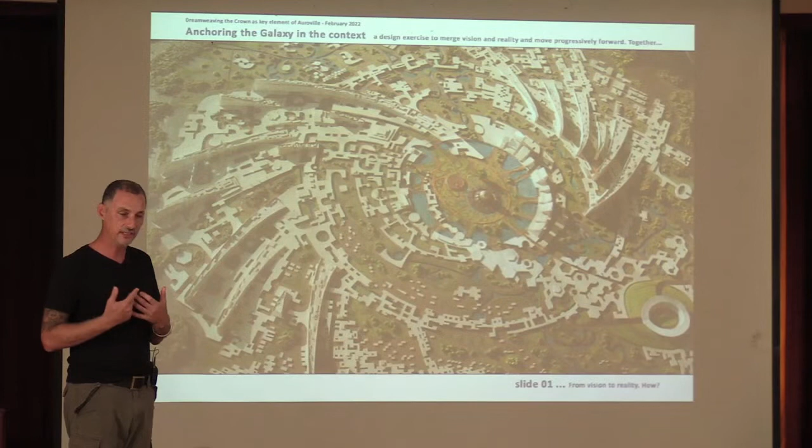So I picked that out, and I'm not shying away to say it was a kind of offering to see how I can bring together the image of the galaxy, its interpretation through the master plan right-of-ways, and land that in the context and see what really remains. How exciting does it become? It's something I always wanted to do. I always felt, how does this image, which is not realistically implementable now for many reasons, and I think it was never wished to be a one-to-one model to be built. It's an ideation, it's a process. I always wanted to see how that changes when it comes into contact with the many aspects of life in this area.

Yeah, maybe the next one, Sophie.

There were a lot of basic assumptions which I put down for myself, not to offend anybody, but just for me, what's the framework? Also I did that work because for me it was unthinkable working on the crown and providing for the ideal version of the crown we all want, which is reduced traffic, e-mobility, non-polluting, pedestrian. I still have to see what I do with the traffic which is here and around us, how I facilitate that to come as close as possible to providing the framework for that to happen.

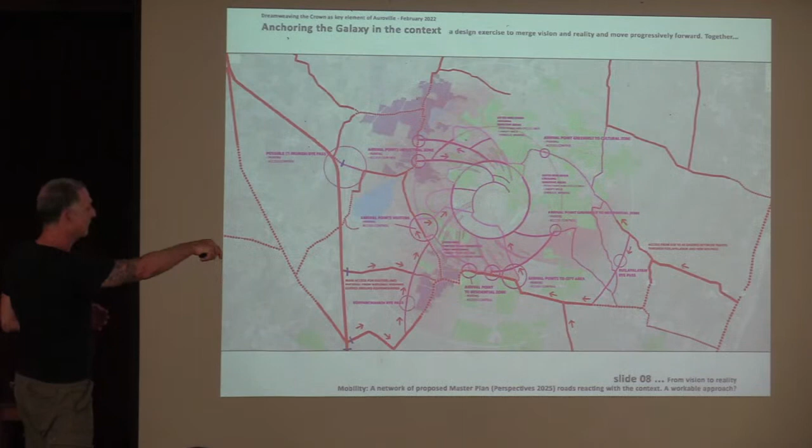Here at Irumbai, where I have the temple, which could be a very beautiful spiritual arrival point, the road comes from Kut Road over the Red Earth Riding School, next to the visitor center, or extending down to the road which goes to Auroorchard and Hope, then into Edayan Chavadi, or coming up from Bomayapalayam, Jaima corner, going a bit up on the already paved road, and then bypassing Kuilapalayam village on the outer line of the master plan area.

So here I listed out the key elements of the mobility proposal as a summary; there are many more points. The first would be an in-depth study of the existing traffic situation and patterns, making reasonable assumptions for the near future. Lalit was a great inspiration with his growth studies of the bioregion, looking at what constitutes non-Auroville traffic versus Auroville traffic.

Using the existing road system to Auroville's advantage, upgrading it wherever meaningful, having efficient filtering and check systems in place to sort traffic into and through Auroville. Most important is to establish efficient relationships with the local administrators from the bottom up, and to unburden the neighborhood villages from excess traffic directed to Auroville via bypass systems.

Guide as much as possible all visitor traffic to Auroville to come from the west, from the national highway, via designated roads bypassing Edayan Chavadi. Block all traffic trying to use our roads to avoid the toll at Moratandi, which should be fairly easy. Implement all the proposed master plan roads wherever they make sense.

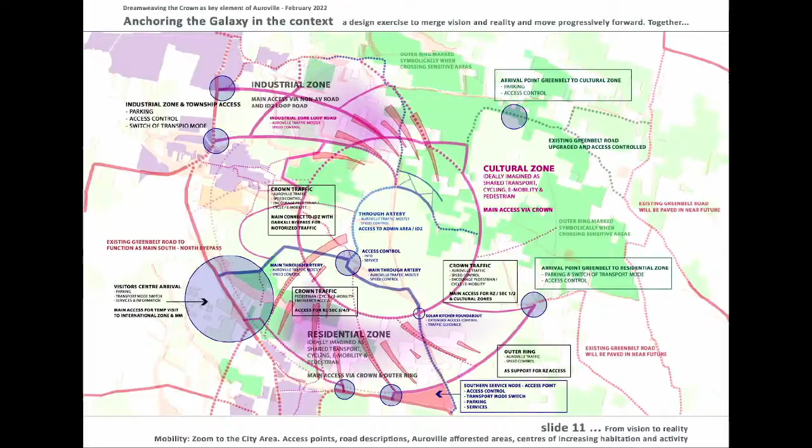I have the Crown Road, which can have different experiences. It could be, and I'll go to that next. I have a large access here for the industrial zone from Kottakarai and just south of Alankuppam. I can form a loop road with just the extension of existing roads over here.

Next, focusing on the Crown - the idea was, and I borrowed a little bit from you, these jewels of the Crown, to have, wherever the Crown interacts with the different zones, the different roads, different lines of forces, different parks, portals or focus points which could have a very distinct character.

So the whole experience - and I think this was very beautifully mentioned by Marie - the whole Crown is not one singular kind of experience, but it's really an expression of the diversity of the place, of the people, of the different contours. Next please.

Then it goes here into sorting that a little bit more. Starting from here, I have the Solar Kitchen roundabout, which next to the one down here is another additional traffic switch - another filtration, parking point. I have the existing Crown here, so I could have a small plaza here where the Vikas radial starts.

I could have another one here just south of the private land over here. I have a large potential of a beautiful public plaza at the cultural zone.

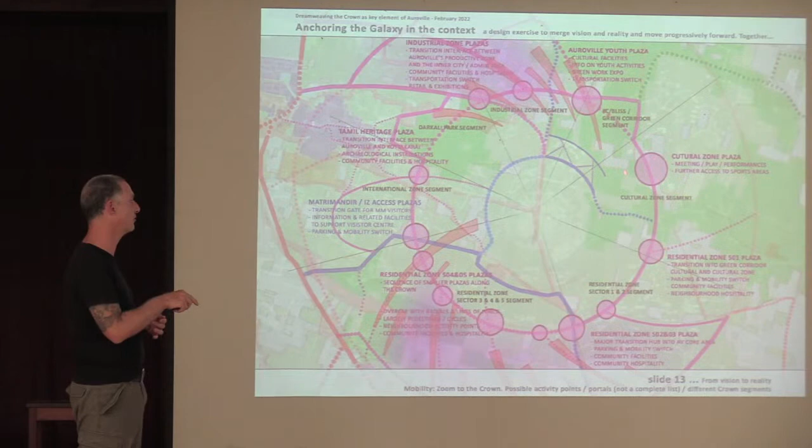Next please. So here we have a little bit of the general feedback provided last week. There was overall appreciation that the approach takes a realistic look at the overall situation and focuses on mobility, something we all experience in our life. There was general agreement that any work on the Crown needs to look at the wider context.

Maybe that was also a shortcoming in our dream-weaving, that we focus only on positive feedback. Maybe that can be reviewed, because sometimes critical, negative feedback can be extremely helpful.

It was very much appreciated to look at the dense situation in and around Auroville, in the local neighborhoods of Kuilapalayam, Edayanchavadi. There was general appreciation that the existing roads are seen and used as a given reality - an opportunity for effective and neighborly collaboration, and a chance to explore forward-looking and sustainable traffic solutions inside Auroville. Next.

Discussions of the advantages of keeping access via the Certitude Road or via a new radial. I show that the appreciation of how the proposal aims to find ways to route motorized traffic around sensitive areas.

Darkali, Bliss, even Silence in the industrial zone. A big appreciation of the attempt to deal creatively with the symbolic expression of the outer ring in sensitive areas, such as the northeastern transition to the Greenbelt. We have Gaia Forest, Samridi Forest.

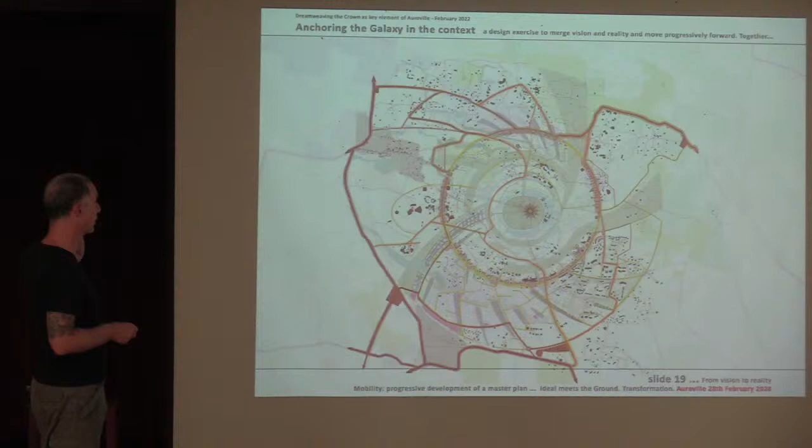So now the focus would be just to zoom into different areas. So here down, this would be the residential sector 2, 3, 4, 5, with the highlight being the line of Goodwill.

So there was a discussion really on: do I keep this road, which has been there for us for 53 years, or do I open up another radial over here and have access into here? I believe that having that road offers us great potential — it's there, it's funded by government money, so I can't easily undo it.

And it really allows us to work as an immediate step, starting from here. We have to talk to the landowner here. But is this already 20—

2 minutes. Ah, okay.

So good — this allows us to really build the most ideal version of the crown that we are capable of right now. This is in discussion, this is there. I don't think there's much resistance; I think everybody is really waiting to start with something like that.

At the same time, we can use that entrance here — this needs to be seen what that becomes — and work on this segment of the outer ring, which we did already, which is part of your planning. I think you presented it to the governing board.

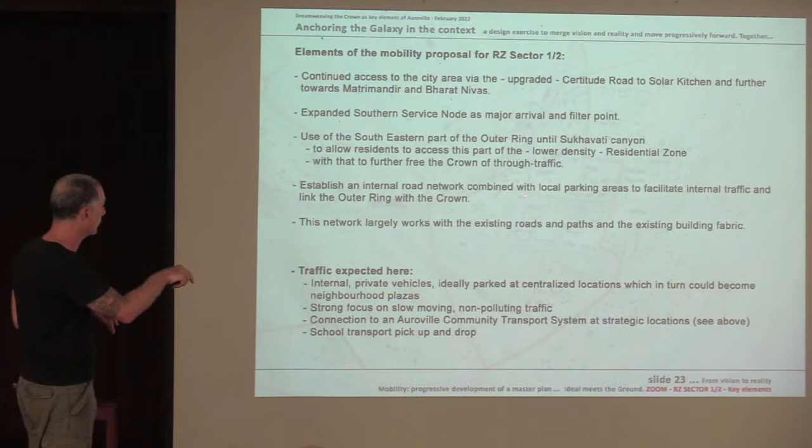Strong focus on slow-moving, non-polluting traffic, connection to an Auroville community transport system. I could imagine the school bus going along that route, and kids use that, they walk here - this is all then perfectly walkable. There's a pickup point here and then it goes further to the cultural zone.

Here we come to the cultural zone. Ideally I don't have any through traffic from here towards the industrial zone over here. Industrial zone traffic is largely taken care of by the industrial loop roads from the Kotakarai Alankupam roads, and I have the road coming in from the northeastern Greenbelt coming in here. It's remaining, but there is hardly any traffic on it, so the traffic would really stop here.

If I have larger events, I have the stadium, of course I have to deal with traffic coming in and I need adequate parking. There was the idea of creating, to further free this part from through traffic, a road here along in between the green corridor and the sports area, coming from here and ending up somewhere at Dana, carefully cutting through it, not really disturbing much of the beautiful sanctuary forest we have over here. This would further allow people, if they have to come from here, they could go here and then down here.

And then furthermore, I could have another - I think Tejaswini will maybe talk about it - there is another bypass behind Kalabhumi to really create an almost pedestrian, very active, alive cultural zone.

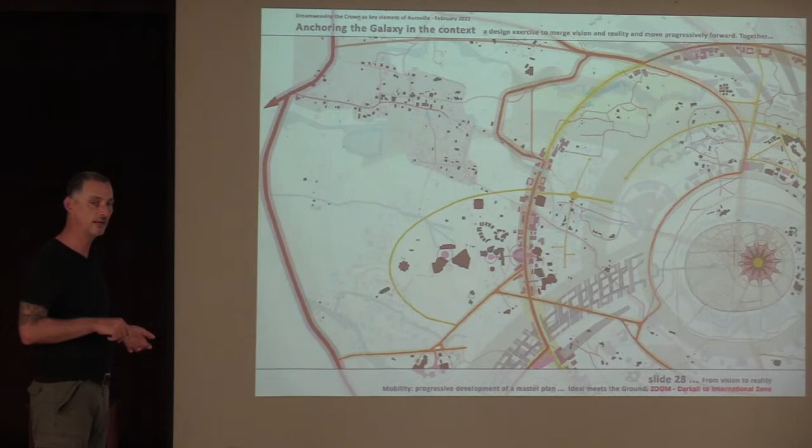Next, please. So this is then the focus on the crown. Next, please. And these are just step-by-step implementations of what could be possible right now.

Find ways to unite the majority of the community behind a shared vision, a concerted effort on land protection, land acquisition in collaboration with the Auroville Foundation, your office, the state and central government, and the Auroville International Centers to help with fundraising.

Establish effective bioregional communication channels, establish effective access control points, toll gates from the national highway, strengthen the Auroville security system, decide on the upgrade of the Certitude Solar Kitchen Road as provisional 10 years plus, and a second transport switch at the Solar Kitchen roundabout, which many fellow architects have been working with.

Start planning on the segments of the crown that we have - either the existing one, the one on Michael Bonke's land, or the stretch clockwise from the Solar Kitchen.

Improve with small interventions, like Tanya and others said, the existing paved stretch of the crown, and start with community-wide consultation processes to actively involve the RA. That's it, so I'm really looking forward to tomorrow. Thanks.

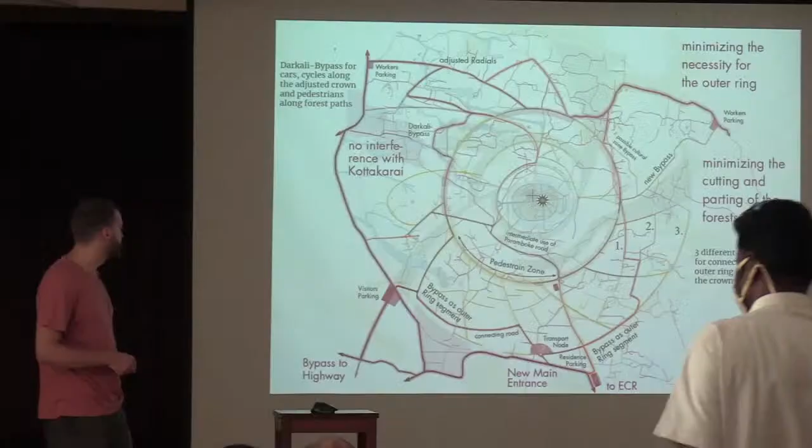In this version, I included also the transport node, which is in the '99 plan. I think there's not much that speaks against it, actually.

For a first step to solve the parking solution, maybe to get something in place like a car sharing, we could have parking houses here, right at the entrance, and the visitors parking here.

Maybe one point that I find important is also to think that we keep using these roads, but there are different points where this road can be cut, like in the entrance here or with a line of goodwill there, to make the inner zone more calm.

I try to become a little more specific with the plazas around the crown, identifying centers where it would naturally be to have these plazas.

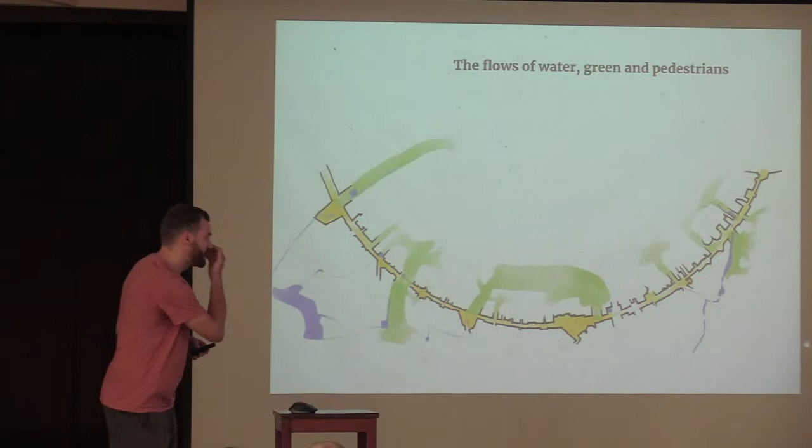You can see the interplay of the major plazas, finding these spaces, and also interlinking them with green, opening at least two of the main plazas up to the green space, and having the water catchments around the crown.

And one thing that, when I try to kind of get an idea of what is happening in this pedestrian zone, what kind of typology suggests itself by what is there on the ground, taking into account that I kind of would want to create density to make the crown important and connecting.

Maybe in the first part, from the Solar Kitchen Plaza to the first Radial Plaza, it could be very dense and city-like, maybe even G+2, G+3. Then in the middle, where the crown intersects with the Joy community, you have a kind of loose ensemble which is around the crown, and maybe this could be picked up on, so a village theme could be created there. Then towards the green corridor, and towards the line of goodwill, the structures would get bigger and bigger. So it's three themes: the dense city, the village, the megastructure.

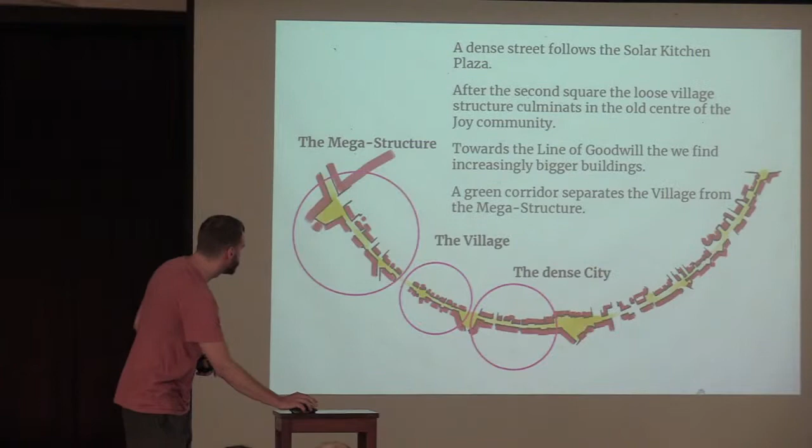You kind of see the more loose ensemble, and then with one line of goodwill touching the crown, the next theme starts.

And there I just have two versions: one not including the green corridor in front of this line of goodwill, and here it's there.

One major angle for me to kind of get a sense of urban planning was the writing of Christopher Alexander, because I really appreciate how he understands space making and all that. The most well-known architecture book of the 20th century is actually A Pattern Language, where he created an encyclopedia of well-functioning patterns in architecture, and this concept was quite influential, even laying the groundwork for Wikipedia and stuff like that.

I go into so much detail because I think it could maybe be something of how Auroville could communicate with Vastu Shilpa and evaluate the specific points of discussion to really have a good dialogue going forward. In that manner, I brought also a few ideas of how these patterns could look like. So the main thing is you try to really coin a term so it becomes graspable, a clear problem statement, then a discussion, ideally with a lot of scientific input, and then a solution of how you want to solve this problem.

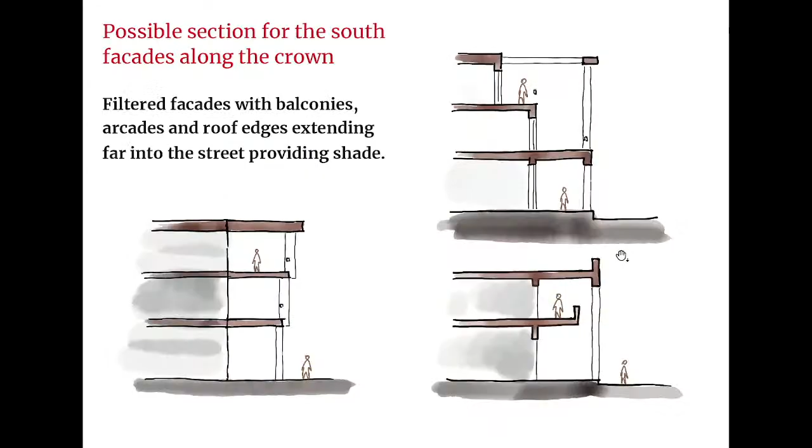And then apart from that, also what other shading elements could be interesting for placemaking. One pattern that I picked up from Vastu Shilpa is actually having these water catchments along the crown, where the crown kind of creates this bund, at least nearly all the way in the residential zone — this typology of the catchment pond with gabions, so you would have a kund, which is a percolation pond at the same time.

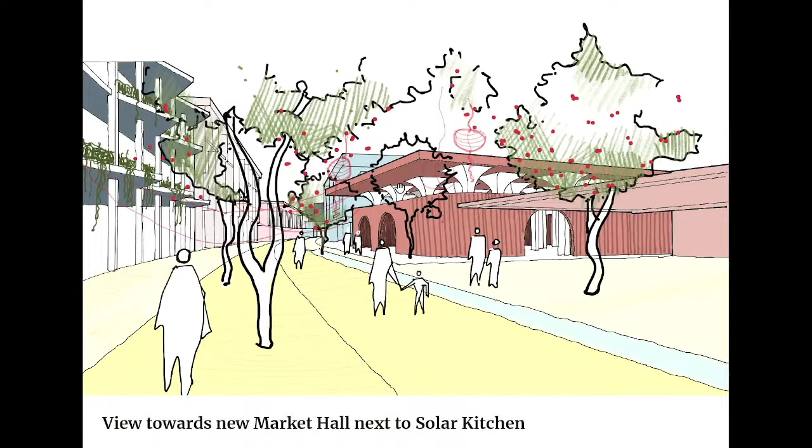Again, the view on the Solar Kitchen Plaza. This is a little exaggerated with a water tower, but to get an idea. This is a market hall that could be where Foodlink is now. And this could be the second plaza at the radial, again with a communal space along one of the vistas.

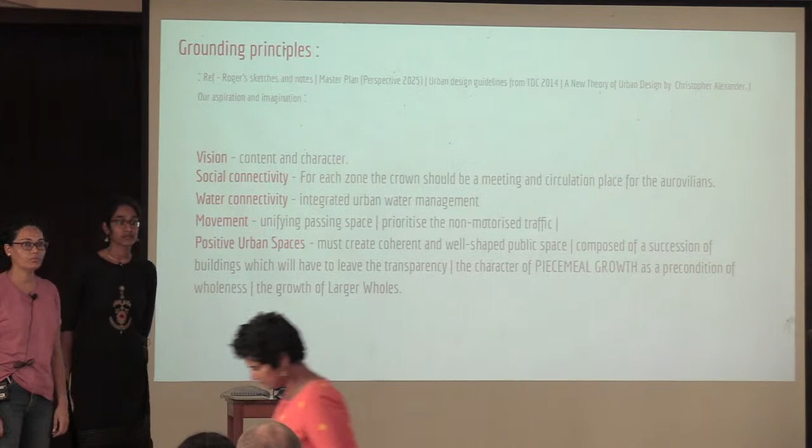Hello, everybody. We'll do a little recap of what we had done so far. Starting with the grounding principles, more about the content and character, which is not only about the road along the crown, but all the projects and spaces that come along. Social connectivity and water connectivity, because we have emphasized a bit on water in our coming slides. Movement, we're looking at this more as a unifying passing space and not as heavy traffic on the crown. And looking at the urban spaces, we are basically saying create more coherent spaces and let the projects or activities which come along the crown relate to the larger whole, not just as piecemeal in itself.

Oh, that's too fast. Right. Okay. So I won't go into details because we touched upon this last time quite a lot.

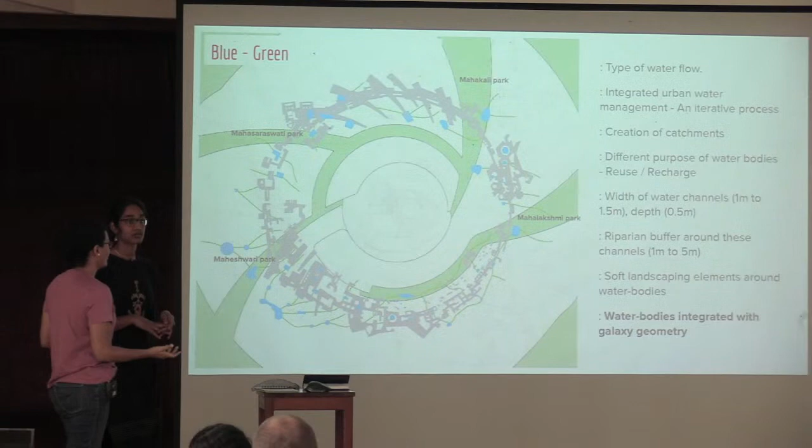Starting from the north, that keeps changing according to the lines of forces, the number of which is always varying I think. The notable thing here is that water management is an iterative process, it's not going to be like this forever. Somebody pointed out in the morning that the water in the galaxy is looking different, more flowing. So from here we can move towards that, because we will be having more density and the runoff will be much higher. We will work out a different strategy that will evolve as we are developing.

Why does it go so fast?

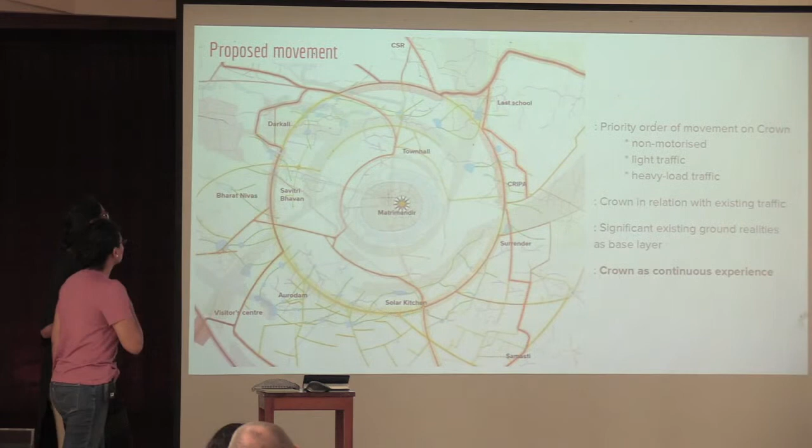This movement, we won't go into details because Fabian has already touched on it. We're looking at the crown more as a continuous experience and less of a vehicular one, so the different details we've worked on will show more of that. The place where we've done things differently is here, where we are not making it motorized at all, but going around it, and we'll come to that when detailing that stretch. Just a quick thing, sector 3, 4, 5 in the residential zone is cycle path only, then it continues as a motorized road, vehicular road. Through Darkali till the end of that little radial coming in here right now is only cycle path.

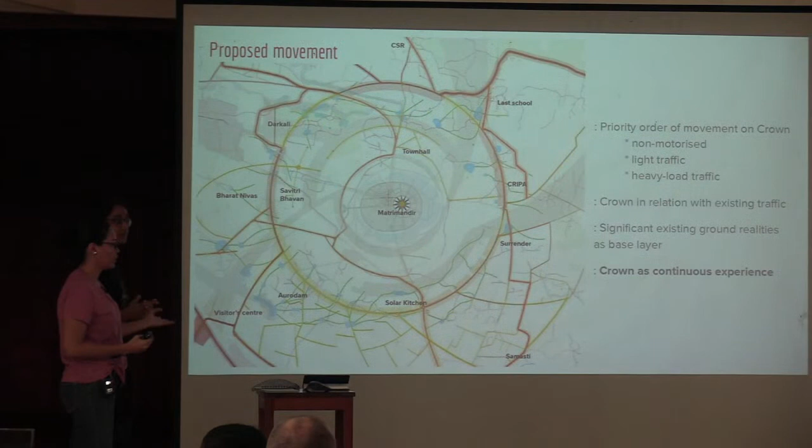So looking at the human experience, basically, the kind of spaces that we've created all along, we're trying to see how we can experience the crown.

When you come to the junction of Matrimandir Visitor Center, there are tourists there, and also a kind of diversity there, which is also an initiation for many people into being in Auroville. Going further is an archaeological site, so it's a kind of connection with the past.

Then you pass through Darkali, which is basically about being with nature, building relationship with nature and different forms of life. Going further is a kind of exchange zone - there is trade, this is the industrial zone. So trade of nature, there would be a lot of learning spaces and interaction spaces.

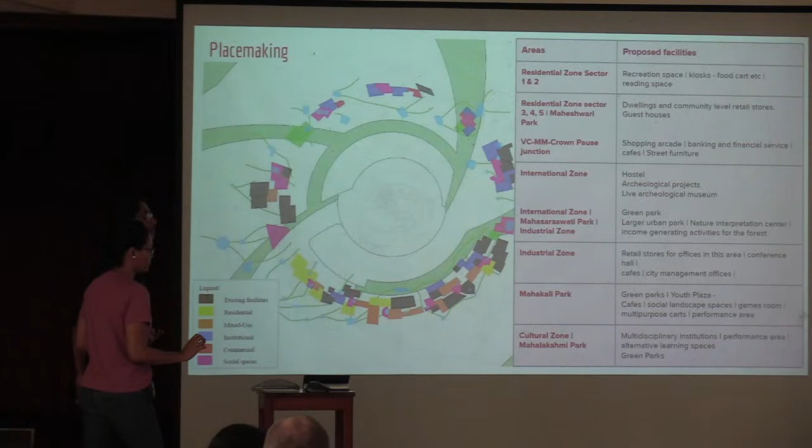Is this the master plan? Yes.

And so this is where we start. Last time we tried to look at 16.7 meters as right of way and worked around that. Within there was flexibility that we kept between 2.5, 3.1, you all know those numbers. We kind of rearranged them, and at that time the aim was basically to see how we can get social landscape spaces and give them more priority. That still remains, but over the last 2 weeks we had detailed contemplation and also a lot of feedback that we got last time.

Now what we're trying to do here is actually fixing 2.5 meters as an infrastructure corridor, mainly for the HT and LT lines and maybe OFC also, because we need that ring as per the electrical master plan. So that could remain there. But we felt that to give the kind of experience we're talking about, if we clear out that 16.7, we are losing a lot. That also got confirmed by the presentation we had - basically do the other planning first, and infrastructure would fall in place according to the planning that you make.

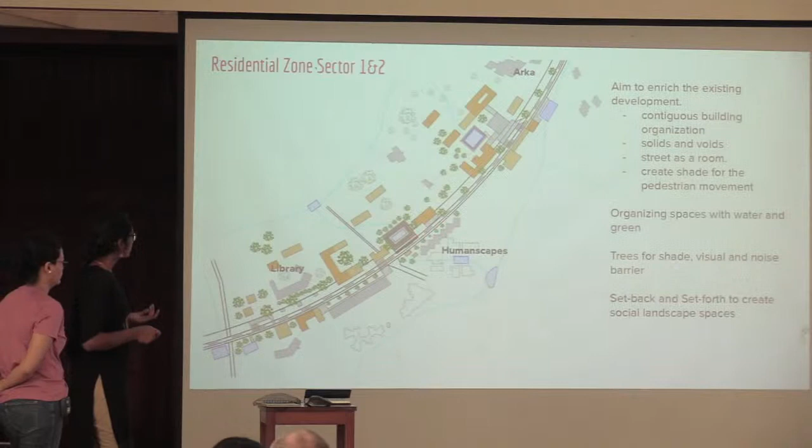And then as we go along here, this is humanscape, and then there is another water body that can be coming there, and around that is kind of a stepped environment, which is again a seasonal water body. So when there is no water, it can be a nice interactive space where some performances can be happening and all those things.

And then here if you see, it sits forward in that space - it does not come on the road but sits forward. So in the evening the road also becomes like the whole space, and there is no curb that we are thinking of.

So another courtyard here again, and then this is Kalpana, and then there is a colonnade that is already going, and then there are some trees.

And here we try to second the point that Ganesh mentioned, that instead of looking at avenue trees, we use trees for how they can help - either as a visual barrier, or as a noise barrier, or to provide shade. All those kinds of things we have explored.

So here is another courtyard. Around evening there can be some small kiosks put up, and it can be totally different, and then it becomes a road again. So that was the idea here.

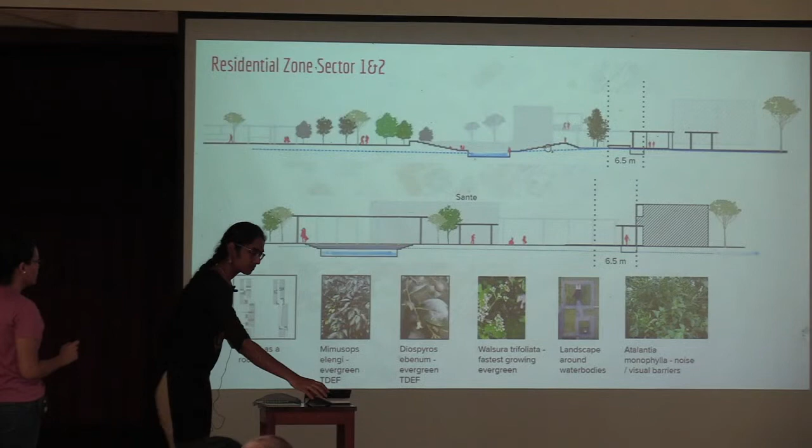And so in this stretch, knowing that north is up, there is a lot of - we all know that this road has always been very sunny. So what is important is to build across and close-knit, have trees which would give shade and act as noise barriers, etc. That's very important climatically, to organize those spaces and have that stretch of road more usable, more like we say, street as a room.

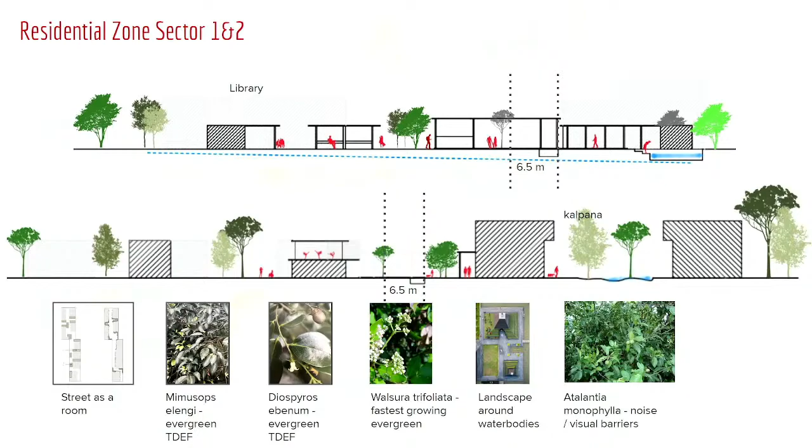So these are some of the sections. If you see, this is the road, the 4-meter road, and then the 2.5 infrastructure. We try to show what is happening around, because it's a continuous experience, not only along the crown but across the crown. So this is the courtyard we're talking about, and here can be room for kiosks that can become active, seating area for dining and all those things. And there is a nice corridor leading inside to a nice water body.

This is another section, in front of library, and this is in front of Kalpana, and in front of Kalpana again the road is there. There is something happening. So this building is set in the social landscape space, but it gives a walkway.

That's another exploration. We also tried to explore some of the species that can be used for providing shade, which are evergreen and TDEF species, which you will see here. Thanks to Glenn and Islin for helping us with that.

So this is another section in front of humanscape, and in the background this is the water body I was talking about. Another thing is, in these spaces we've created in front of humanscape and in front of Kalpana, during this monsoon there were, for 3 days, water above the crown actually. So that clearly shows we have not made ways for water.

So instead of undoing the road and doing it again, we can let the water flow on the crown, and make a nice small dip above. So the water is flowing, mongooses can cross, and all those things can happen. And then we still have a road, which also acts as a speed barrier - if you have a straight road, it's like a speed breaker, gradually.

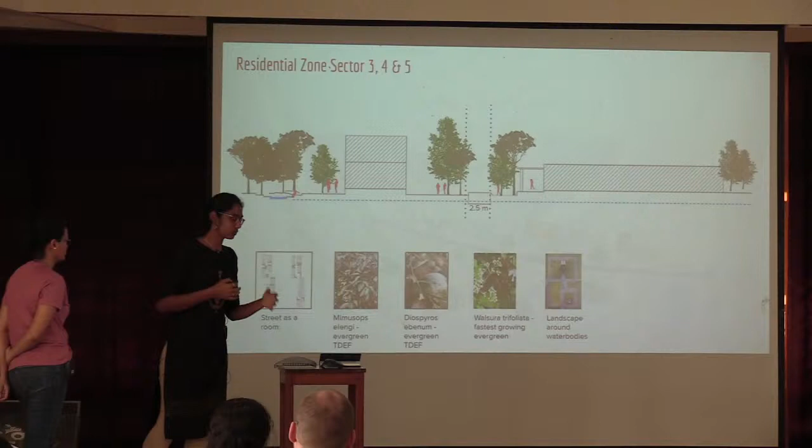So coming to the international zone, we have taken this area from Unity Pavilion to Language Lab, which has a very significant space of the archaeological site. So here we are saying, go to the section.

So yeah, this is again the 6.5 continues. The important thing is because we have this area of importance, we have this little deviation of the motorized road, but still the cycle path and walking experience continues along the crown. This is to respect the... and also we could easily make the archaeological site part of the social space.

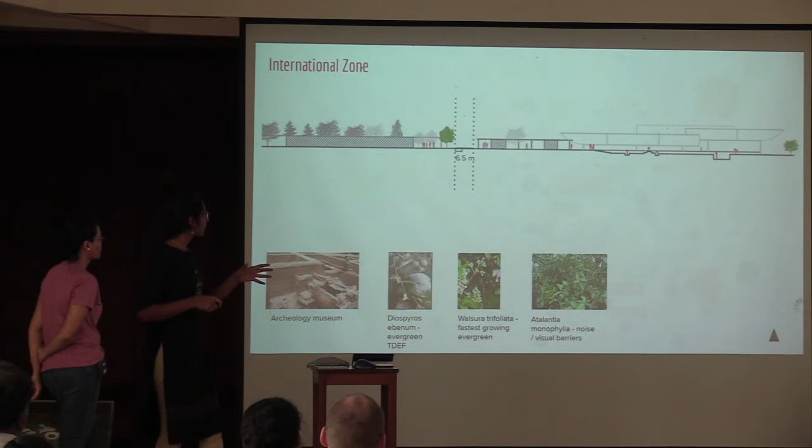So we have this kind of underground experience where we have the live museum and everything. This is where we talked about the human experience. It's really to the scale, and we are connecting with the past, so that is very important.

So Darkali, as we go, the main idea is to keep the edges active with activities happening in the industrial zone and international zone, and then keep only the cycle path through, because if we do much here, we are disturbing the ecosystem that is there.

But it's an enriching experience for us to have it. So we're doing as minimal as possible here, and trying to coexist with all forms of life. So it's not only trees and not only those things, it's all forms of life that we have, and they play a huge role in our ecosystem balance.

Coming to the industrial zone, I think many of you have done this. Don't look at the number of lines of forces, it confused us too since at times it was 4, at times 6. But basically, the low-lying buildings along the crown could come up now, and this stretch of road could be developed pretty soon.

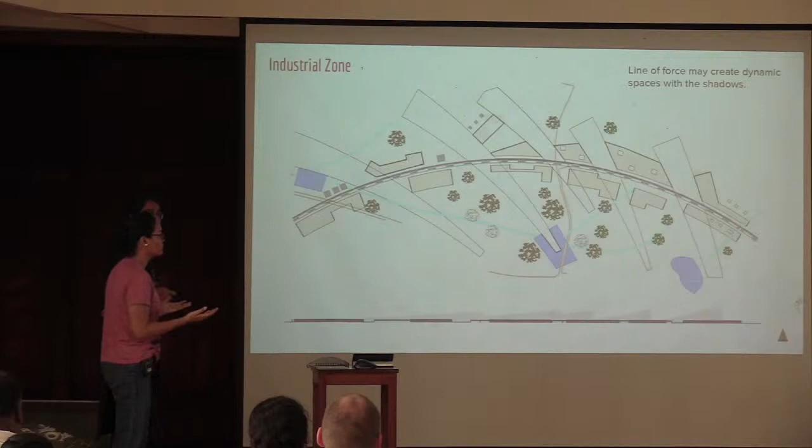Spaces-wise, as we said earlier, we could bring offices and collective spaces which would cater to the industrial zone, like retail stores and courier services, and also borrow from different zones to create a nightlife in this, like Shivangi and Radhika had talked about.

What we are focusing on mainly is to create unbuilt spaces, but organize them in a way that responds to the footprint and the need of what actually existed there. So youth, when we say it, is not only restricted to the youth center, but could be enlarged in a very beautiful manner, creating spaces for youth-related events and activities, or even otherwise. We're talking about this stretch more than just a cycle path.

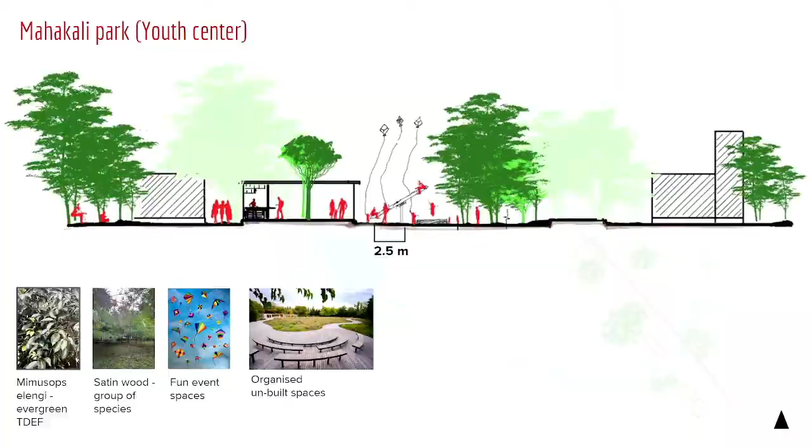That's the section, which is 2.5. It stays because the HT ring and electrical stuff can go through that, and if required, other things could also plug in and go through it. You can see the way these spaces are—they could be very semi-open spaces with tree shades and stuff like that.

And have a vehicular road which is a little bit offset on the outer side. You can see this is Kripa, and that's Kalabhumi. If you see the scale of the hexagons, we're not talking of something very, very big. There are a lot of existing kaya trees here, so it will be challenging to see how we incorporate those and actually build into them—that's going to be very interesting.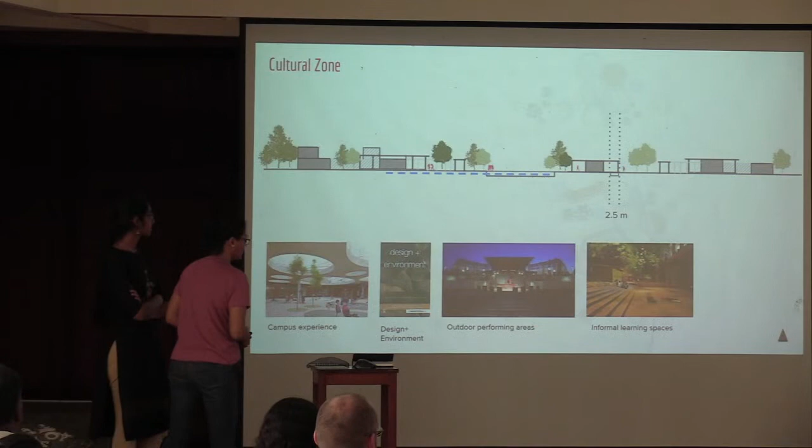That's the section through there. What we're saying is 2.5 again stays here. The water flows along and could become social spaces, meeting spaces. These are just some pictures from different campus learnings. There can be night street plays happening right on the crown. So when it's not defined, we can define it with activities rather than space or any enclosure—that is also a possibility.

Yeah, I think that's all. That's all.

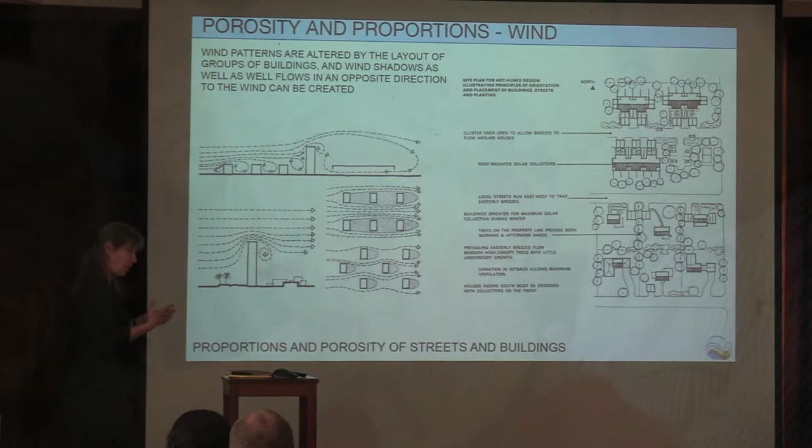This allows for the low sun, the trees to shade the buildings from the low sun in the morning and in the afternoon, because the south and the north facades we can shade with overhangs.

So then going back into the porosity, what happens in urban environments when there is more buildup, more impervious surfaces.

It increases the runoff and it reduces the capacity for the ground for the water to percolate into the ground.

So it's something we have to take into consideration while we develop the city, that we have this water and we have the climatic situation of having this very short stretch of the monsoon where we have a lot of water.

So we always have to keep that very much in the forefront of our minds when planning anything and reduce or minimize the impervious surfaces.

That also translates to buildings in general, the porousness. So I tried to take a little bit of a bigger building.

Just letting in the light, the daylight, making sure that the wind can flow through, allowing for vegetation in the buildings. I'll come back to that later.

And then, of course, also being able to look through the buildings so that it reduces the massiveness of things.

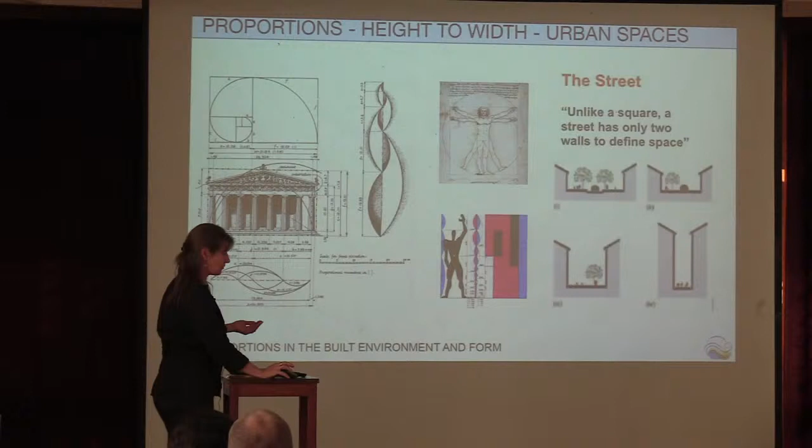So looking at proportions and scales in urban design and buildings in general, this is just an image. It's been done for hundreds and thousands of years. Humans have looked at these things and thought about them. It's something we just sometimes have to make sure we take care of.

So then back to the slide which I had last time, it's just the familiar streetscapes of the proportions of what we know in Pondicherry.

Just looking at that and giving it some scale so that we can understand the different proportions of residential streets, mixed use, and the shared mobility in the narrow street, which is a wide road but it lacks shade.

Although it is used, everybody's always trying to find that little piece of shade, which is usually used up by vendors. And the beauty of public spaces which are integrated into the urban fabric is something we really have to look into also here.

Then the problem is if there is no shade, the spaces become very reduced in their capacity to be able to use them, so then they're only used in the evenings.

And then looking again at Pondicherry's planned and unplanned or semi-planned green infrastructure.

Beautiful trees, but they're not given the space they need, which leads to all kinds of problems in infrastructure, in the buildings and in the roads. A slightly better option is where they've started planning, but you can see that when these trees grow to this side, the situation will not be that much better. This is a slightly better situation.

Then another problem is as we develop the city, something Islan mentioned also is the heat island effect. Something very important to keep in mind, because the more buildings, the more heat gets absorbed in the buildings, which radiate out, and vegetation can help a lot in reducing that by shading the surfaces of the buildings so that they don't heat up.

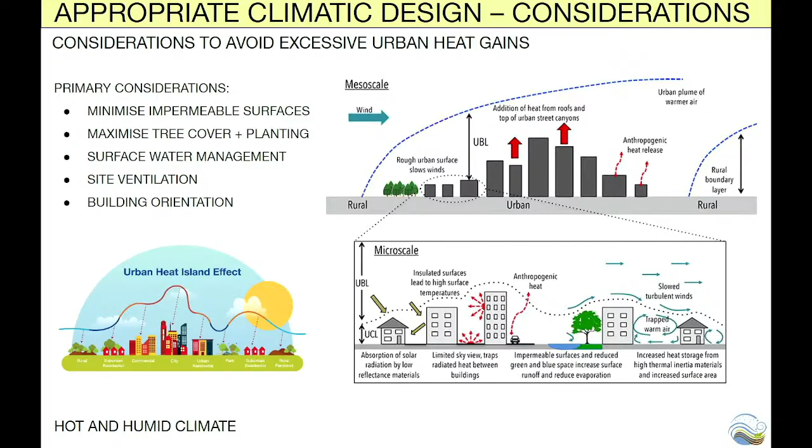Here again we have just the list of important things to consider with the runoff and the difference between the two.

Then going a bit more specifically, getting more into this actual site situation. Allowing always for the wind to pass through the site so that the houses have natural ventilation as much as possible, which can very much avoid air conditioners, which again lead to more global warming.

And the importance of having vegetation in and around buildings. It's great for thermal comfort, air quality, it absorbs noise, so if you have trees and plants close to the building, the noise from your neighbors gets distorted and absorbed. And of course, the biophilia, which is humans are better off in green places.

Just some simple considerations: what I already mentioned is ensuring the shading of your facades on the south and on the north, because we are close to the equator, just 12 degrees north, so the sun actually goes to the north from May to August. So we also need to have overhangs on the northern side.

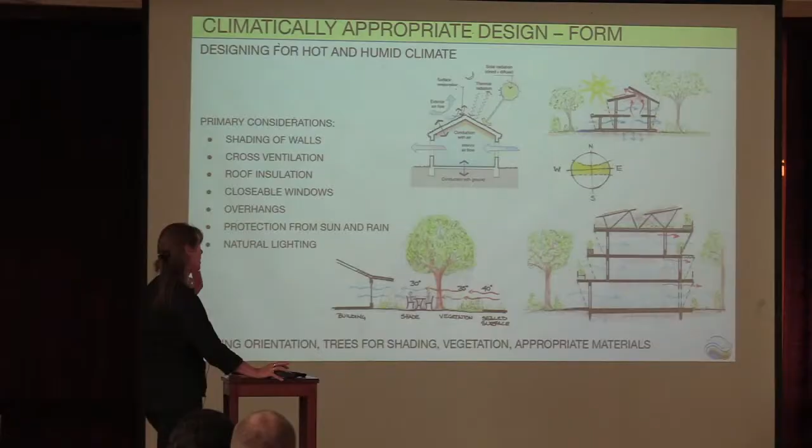I figured out that the northeast monsoon comes from the northeast, and no matter how big your overhang is, you're never going to be able to keep the water from coming onto your terrace. So there's no point trying, but at least you shade from the sun, make sure your facades don't get any sun during the day. The south is more easy because the sun is generally high in the summer, and in the winter when it's low, you actually want it to come in.

So then it's nice to have a bit of sun on your terraces sometimes. And then again, the importance and whatever advantages of having trees, which reduce the general temperature of the surrounding area.

Then I wanted to go look into building materials, because last time I had mentioned that concrete is not the way forward for everything. Of course, we can't avoid it totally, but there's so much available. We have our homegrown poured earth and rammed earth and the compressed earth blocks, and the ancient techniques of lime plaster, building with lime in general, which I've tried to explore a bit.

I asked Satprem, and he confirmed that lime doesn't work with steel, so we can't use it as concrete. But looking just on the internet, I found that nowadays we have fiberglass reinforcement bars, so it's actually an option. There's also graphite, but I think that's a bit expensive. We don't know what the future holds, so we'll see as we go along.

I think if we want to be all we claim that we want to be, we really have to take these things seriously, reducing our carbon footprints and going down that road of maybe sometimes having the more difficult building material to work with, more maintenance, but in the long run it's actually better. Lime plaster and lime building works really well, making a significant difference in the temperature in the buildings and the general climate.

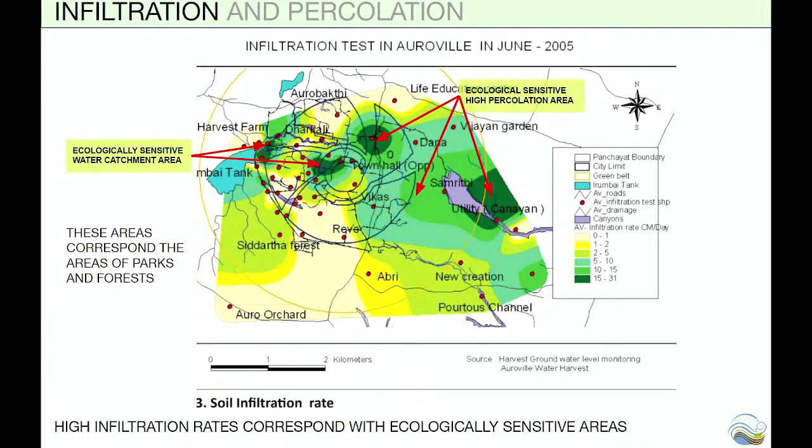Then I had this infiltration map, which is very old, and I looked for a percolation map but couldn't find anything. Anyway, the two are very much sort of the same. What this shows is that the areas with high percolation or infiltration is also where somehow the forests have developed mostly. This is courtesy of, I think, Isla.

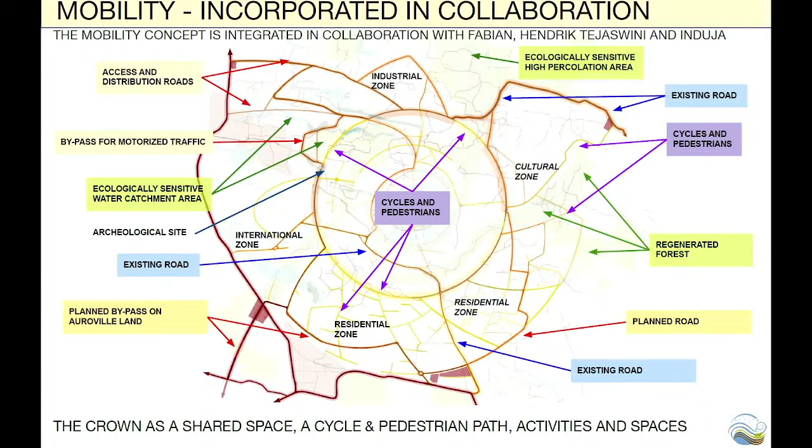And then I jumped to mobility, which I did in collaboration with, or mostly just borrowed from Fabian and Hendrik, and incorporated. So it's just showing where what is. Basically this has all been discussed.

But this leads me to the next topic of infrastructure, saying where there's the parks and only pedestrians and cyclists, and for now also less need in most cases of infrastructure.

So I came up with this very schematic little plan for the infrastructure, to have precast conduits in the places where we will in the near future need more infrastructure to come in. So all these places, the residential zone up to Solar Kitchen, and then this is the center field stretch.

For now there's the high tension cable, and the OFC is probably in as well. So we don't actually need to do anything there, but we should definitely plan for a conduit, because it will be the most dense residential area, so we will have to have conduits on both sides.

And then this is the international zone area. This is not entirely correct, but anyway, we have a conduit there with the possibility to have more conduit. And through Darkali, we just have a flexible pipe which goes in, through which all the cables and conduits, cables and pipes, can go. I'll show you. Then the same goes for the Bliss and this stretch.

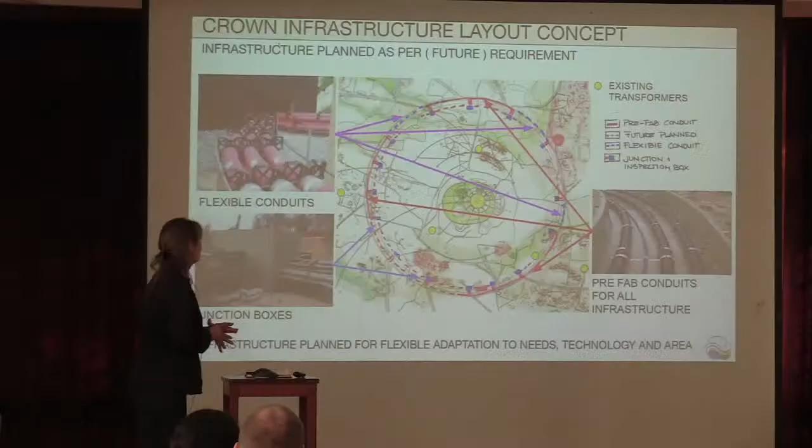So these are the precast conduits, it can all be very neatly laid in, and these are these humongous junction boxes. Of course I've now learned that it's too early to decide on what the infrastructure will be, but that will be decided by the experts when things are more clear.

And these would be these flexible pipes which can go through the parks and the forests, and then just into the junction boxes, and from there they can either go into a conduit or be connected. These are actually examples from the presentation we saw just before lunch from the experts from Ahmedabad.

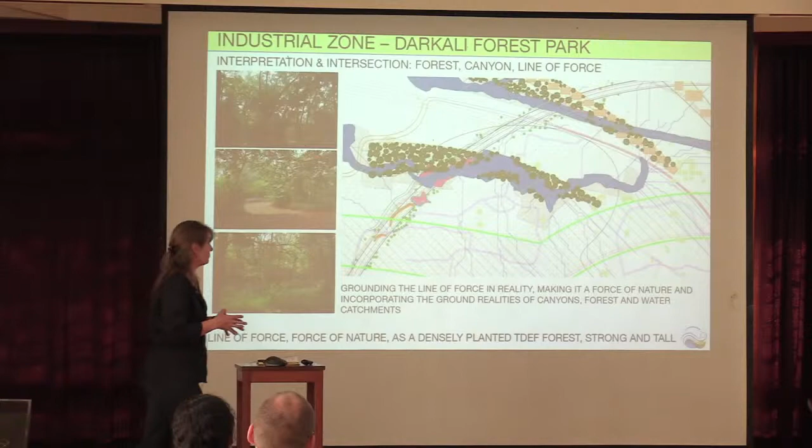This line of force has been discussed many times, and while looking at the lines of force, I realized it's on the canyon. Then last time Neha and Ganesh presented this idea with the water, and that fit in so beautifully. I had the idea to just plant a really dense forest of TDEF, so it has its own power and its own force, so it becomes like a force of nature, what Ganesh and Neha were saying.

We have this other line of force, which is half on the canyon. So consequently, I thought half of it would be planted, and the other half would be very light sort of structures.

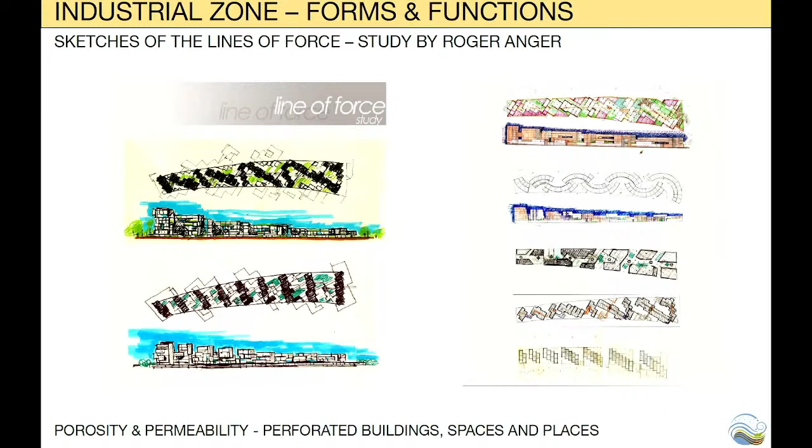So then, by chance, I had a very brief kind of encounter with the lines of force, but I couldn't come up with anything which I thought did justice to it. But then I found these studies of Roger Anger, which actually very much tie into the ideas I have of these open spaces - permeable, porous, and off the ground, so that the ground coverage is minimum.

So these are a compression of the slides I had last time. It's about the industrial zone, where the soil typology is not so permeable. So it's good to have buildings which are raised off the ground, so you allow more ground for water to percolate, rather than having too many closed spaces. And again, bringing lots of nature in, and keeping buildings very open with cross ventilation, wind, shade, nature.

Going into the street width, looking into that further, because there was an interesting comment I got - that the road actually just needs to be as wide as an emergency vehicle, so 3 meters is sufficient. It turns out that it's also the most comfortable and the most safe if you give priority to cyclists and keep the cars as guests on the road.

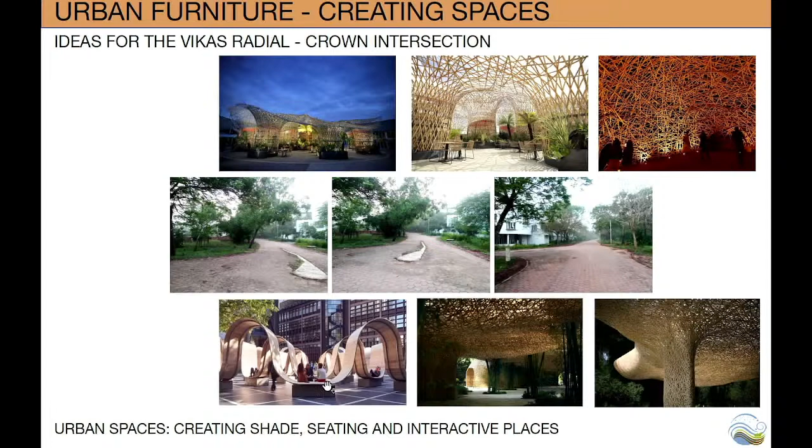So this again is just a compression of what I had last time, the different aspects of what could all happen on this stretch of crown, which I wanted to look at in more detail.

Different areas. I don't think I need to go into that much more. Again, just informal seating areas, some areas where people can exercise in the park maybe.

And then moving on from the solar kitchen, having that stretch in center field between the center guest house and solar kitchen could become like a pedestrian cyclist path with lots of green. And then I wanted to look at the solar kitchen again, so I went into a little bit more detail.

Along the edges, we could have eateries and whatever, and then keep the center an open space, which could be like a sort of step well for activities. And that's it. Oh no, yeah, so just some impressions.

Looking into the future, I found this image and I really liked it, but then I got into a problem at home because they said, oh, but we need solar panels on all the roofs. So we'll have to figure that one out. But I just thought if we could do something like that, I think that would be quite nice.

And yeah, I just wanted to emphasize: maximize the minimum, and plan to allow for the future to be planned, and build only for now. We don't know what wonders the future holds. Thank you.

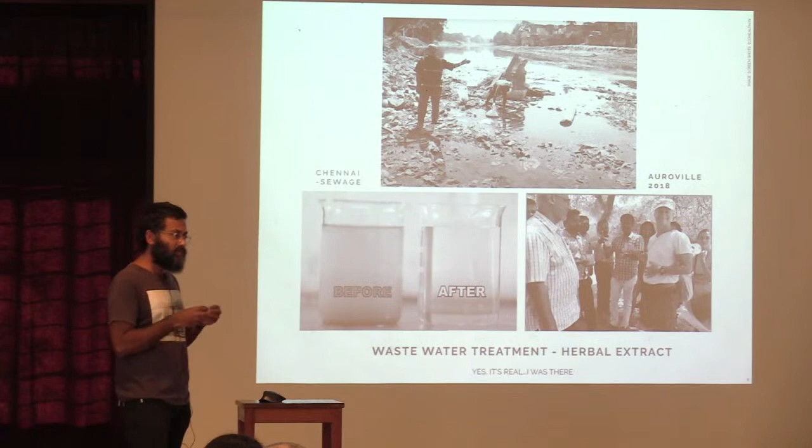So my story starts with the water here. This is one of the water treating exercises. There are several ways, but this is one which I looked at. This is very key for this entire proposition which I am putting forward - using existing water treatment and how we can adopt this to reclaim the water we consume every day.

The crown as a dynamic water system - your used water, reclaimed water, decentralized - you put it into the crown and then utilize that for other things: growing food, recreation, and so forth.

Then water being brought in from the bioregion. This is really crucial - the bioregion becomes part of your everyday, becomes a stakeholder in this. Then using that water to grow food around Auroville and the bioregion, connecting to existing areas. That would take some of the excess water and also connect with existing systems so we can use the storm water and so forth.

Going beyond, seeing how that could actually multiply or expand into clusters within the city. This is a built environment, very graphically showing how food production, living, and this surrounding water could be part of that. There are a few scenarios.

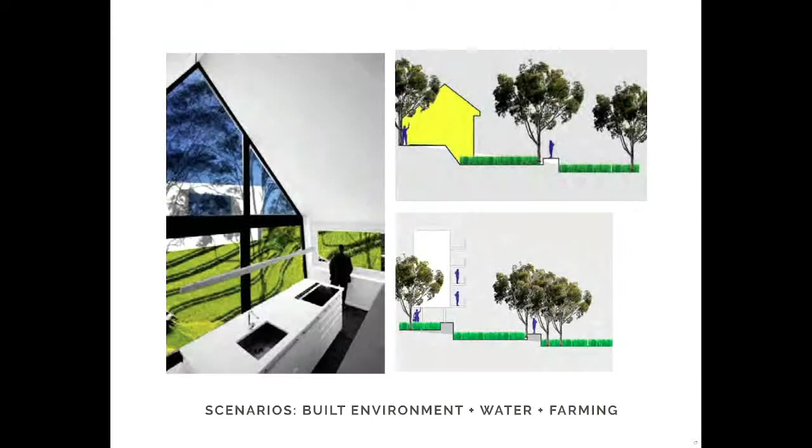I looked at a youth center as the starting point within the Crown, and a Nature Interpretation Center - looking at nature through learning, through different ways, night and day, using the elements as our subject, looking in more detail. This is where it is on the crown, on one of the radials.

Through the existing forest and going under, an installation with water, and there's water on the crown, while touching the subterranean - a few cross sections observing rain and some of the spaces inside. A music instrument using water and wind as a learning tool.

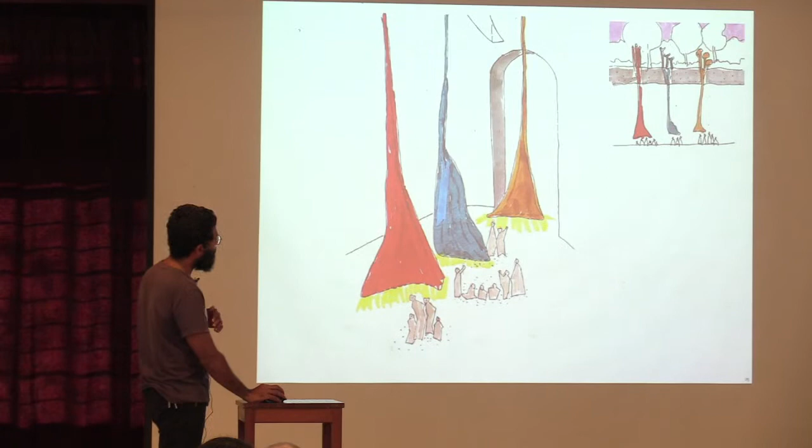So the next one is experiencing food. I looked at some of the trends, what's happening - there's a clue to how we can use this food connected to mobility. So this is people coming to Auroville to experience food, from Chennai, from Bangalore.

The sole purpose is to hire a car, drive to Auroville, and experience amazing food here. It's true - we have all kinds of food here. Why not? So the top of it is on Auroville Road, which is quite busy.

Some of these Auroville units relocating to where there's fertile land where food is grown, relocating outside of the master plan, but still Auroville land. So you have fields and restaurants on stilts. The idea is food is not just food - it's the wholesome experience of it, visual and eating - so that it might change the way we behave with food.

Some examples show restaurants all along the growing food - again, water and food connected. So this is today's presentation.

One of the experiences I took away from interacting with the peers and community members was, okay, all these ideas, these visions are great. How do we see that in Auroville? So I looked at existing conditions, how this could be implemented or worked out. I'm talking about food, water, and community, which includes young, older, and the bioregion beyond, so not just Auroville.

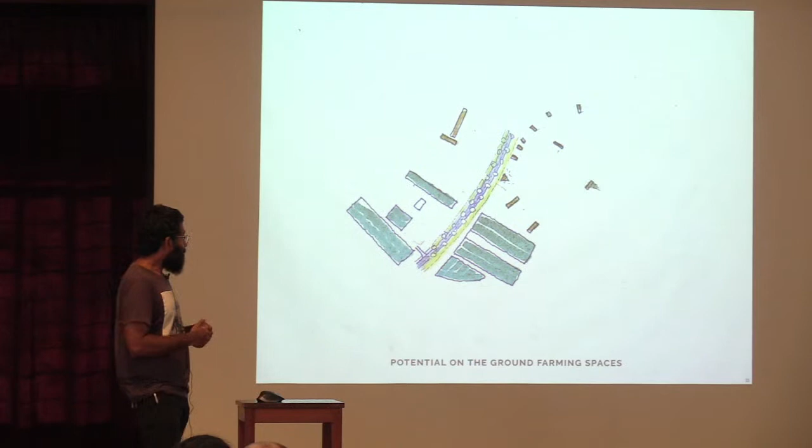So I thought that could probably work on a larger scale, people coming to Auroville, like they're already doing, to grow and cultivate. Farming is a very well-known industry around here. So, rooftops and also the ground - on the ground, temporarily you can extend, or it could be kept for future use. Farming has no heavy infrastructure built on it, so 5 years later if you have other plans, you can move on.

So combine that - you have space on the roof, you have space on the ground, and you have water combining that. So now we have community. This is probably one of the areas.

Looking a bit more into detail, I've taken a small stretch of land, that's Sante and Surrender. So this is the existing road - about 4.5 meters of paved road as carriageway, then about 2.5 meters on each side for trees, one side has a bicycle path with a bit of reserve, then the Sante building. On this side there's a bit more reserve with a stormwater drain. So I've taken that as existing.

So this is actually using the idea of water cultivation. The road is shared - this is very important. The shared space is actually squeezed, but we have a bicycle path integrated into the existing layout and then widened up. I'll come back to a section.

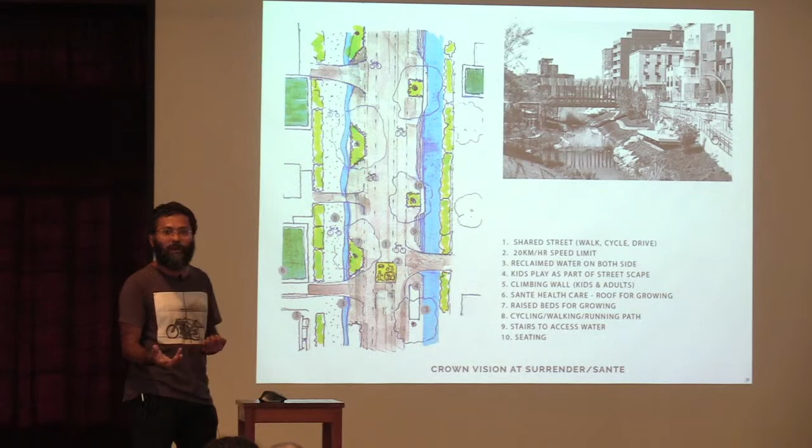Sorry, I'll go back - this is actually in Copenhagen, within the city. Jan Gehl actually looked at it, they carved this out. It used to be a stormwater drain, beautifully converted into a sort of playground where children play. People are sitting here, there's water, and a bicycle path. There are different parts of the world where this has been done, where stormwater is reclaimed and turned into a beautiful space. In Seoul, South Korea, they've also done this, but this is one example.

So looking at the view towards Sante, that elevation of the section - we have raised beds, so kids are part of this streetscape. I looked at adventure playgrounds, which relates to a question asked during the community gathering last session - one gentleman asked, is there play in this? It really struck me, because we're always looking at adults, and we architects get stuck into that. But why not?

If you look at Copenhagen, 50-60 years ago they began integrating child playgrounds and decreasing motor vehicle traffic. It's one of the first cities to eradicate motor vehicle traffic, and now they've really successfully done so in many areas. They've also included adventure play mostly, and I'm seeing that as a crown is part of that - a playground growing, and communities are like a live street.

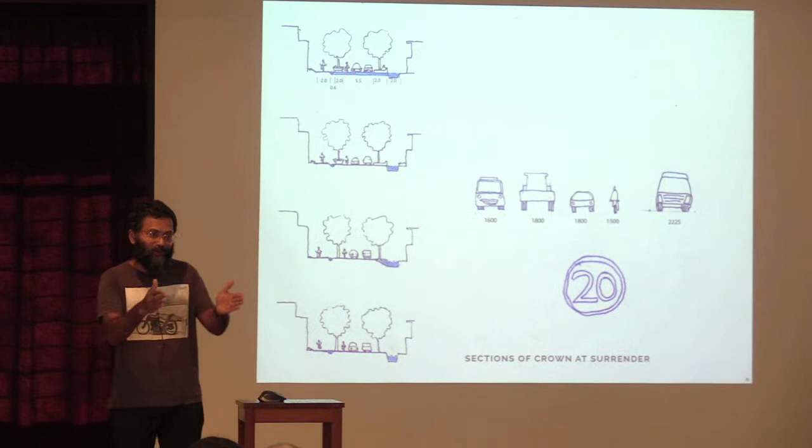So I live in Udumbu, and coming to Auroville, this is a very narrow road. Every time I go, and I have trucks, somehow in the rest of India too, you get stuck in between, there's no place. The driver puts his head out and says, thoda adjust karo - just adjust a little bit. So I go back, this back-and-forth goes on, and there's not even a single word exchanged, and we move on.

I think this is a really amazing quality, and I think we should use that rather than having a dedicated lane for this. We're good at adjusting, Indians are great at it. So I squeezed the road a little bit smaller so that we can work with that.

So how? Let me go back to the previous slide. So this is the carriageway, and this is a little pocket of area where you can actually come in if there is an emergency vehicle - we can actually move into that. So it gives you at least 3.5 to 4 meters of width for a fire engine or VIPs or whoever wants to go through. So there's a clear way for that, but again, it's not a regular occurrence, just an option.

Okay, this is one visual view of that street.

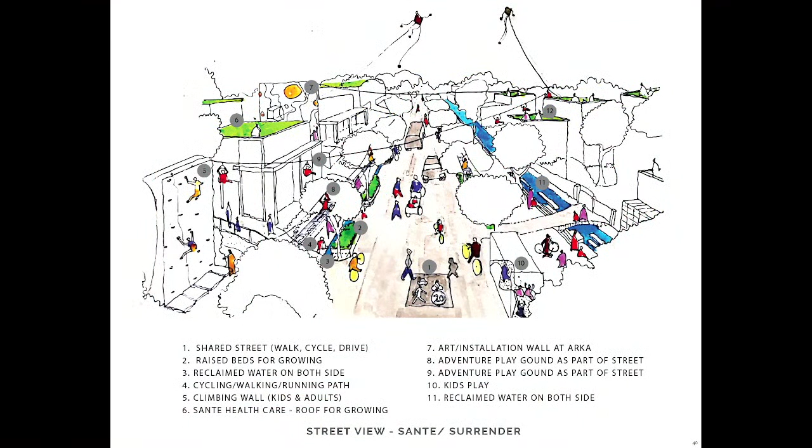As architects, we look at planning and designing mostly through solving problems or meeting the client's requirements. Sometimes we forget that there is life in that. So I'm trying to see - there's no book for bringing life into a street, but it's mostly organic, bringing communities together, different age groups together, somehow combining that. So what I'm trying to do here is give that opportunity to create or to happen organically, to somehow evolve.

If you look at some villages of India, it's thriving, it's beautiful - for a kid to grow, you have so many dads and moms in that. When we design these streets, I've been to some of these cities, somehow they look fantastic on the plan, they look fantastic from a helicopter looking down, but on the ground, it's barren land. And I get goosebumps when I'm talking about this. I've seen it from Myanmar's capital to Canberra to Chandigarh and a few other places.

Somehow we are missing that life. Being in India, we love this village and street life, but when we are designing, somehow, I don't know - this is my personal experience. So what I'm trying to do here as a crown is to integrate different age groups, integrate different aspects of community together. I lived in Australia for some time.

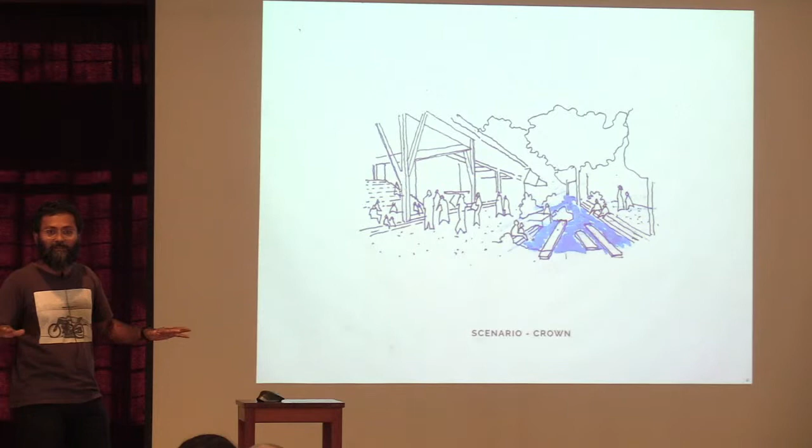I live in a house on the first floor. Mosquitoes are less, scorpions are less, and so on. I think it's a tropical environment thing, I've looked at it in Southeast Asia too. The older houses are all raised above ground by one floor, so the bottom bit is used during the daytime when there's heavy sun. You go under the house and it's much cooler, there's wind cross, permeable walls.

So I see that on the Crown, being lifted up and using wood, reclaimed and laminated. There are plenty of ways we can use old, cheap, small, throwaway wood back into it. And water being part of it, as reclaimed water.

One of the plazas could be like this water built environment and gathering space. This is a picture of like a bioregion receiving Auroville credits, Auroville bits, Auroville spirit in some sort of exchange, bringing the communities together as a stakeholder. That could be a reality very soon.

Auroville lies in a very rich Tamil Nadu and beyond. I think when we're looking at Crown and Auroville's future, this is a rich tapestry we need to weave together. There's a lot of, I wouldn't say benefit, but it's the way to go.

I live in a community where I segregate everything. I go to work in Kuilapalayam, right in the master plan. I am battling plastic burning every day. I am chasing community panchayat work every day. During this conversation, I realized one point I could take away. I didn't win, but by the way, it's still going on.

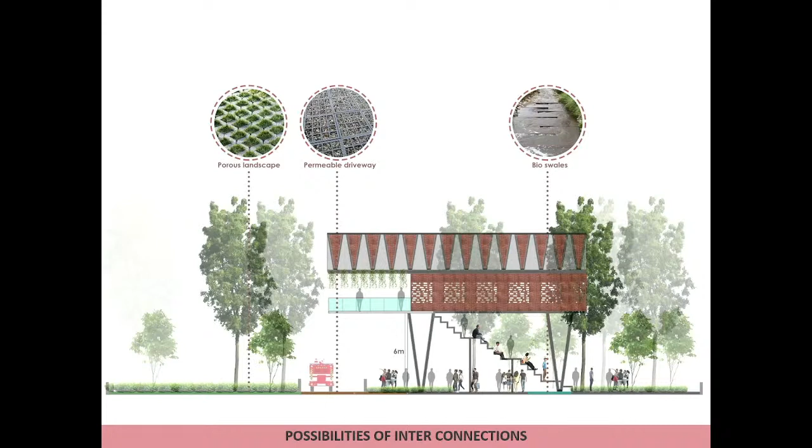We have spoken about it last time and how we feel that the site should start from the crown, not beyond the crown on two sides of the roads. The moment we stop saying two sides of the roads, then we have a possibility of thinking of it as one cohesive whole.

And possibilities of interconnections. A question came in our session last Saturday, the Saturday before. Mari said to me that she would not like to go above there because there's so much vibration from the road and the vehicles. And suddenly I realized that that is not the kind of road I'm envisioning here. I'm not envisioning fast-going traffic here causing vibration, and the fact that we would not like to go over it.

In fact, I was proposing that the library extension happens across the crown. So, it triggered us to think, is that what we are planning of, traffic going on this in whatever way given to us? And now on that, should we even connect?

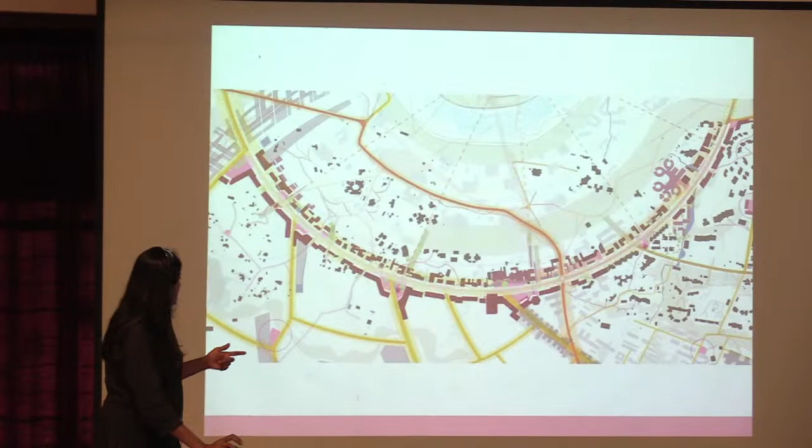And the question comes, what type of street do we need? Because I've taken this from Henrik - this is Henrik's slide, and he has a 16.7 meter road with built elements around it. And as Mari pointed out today, and as we as a team felt, actually it will be like this because nobody really wants to be right next to a road where vehicles are moving, even if you have 2.1 meters and 3 meters. No, we don't want to be around it. We want to be as far away from it as possible.

Then what we will see of our galaxy plan is a clear cut through it. And is that really what we are thinking of implementing? Because really, even Ganesh mentioned that when we pick it up, it's one whole. And no, right now already I see it as two different parts, and the more we go on this line, we'll have more parts.

And I'm trying to work, our team is trying to work on the other direction as to how to connect it, so that yes, at parts it's open because we are talking of porosity, and other parts not open. But to have that, what are the examples we find where we have connections on top of the street? So we went back actually.

We went back, thinking what kind of road do we need. And we said that we don't need a road. What we need is a street, an interactive space, which is there for mobility, yes, but where the movement is not only happening of vehicles and people, but of built elements here and there, and people do want to connect and want to go through, because the Galaxy plan is all about communication and integration, and it should be seen in all the elements and at different scales.

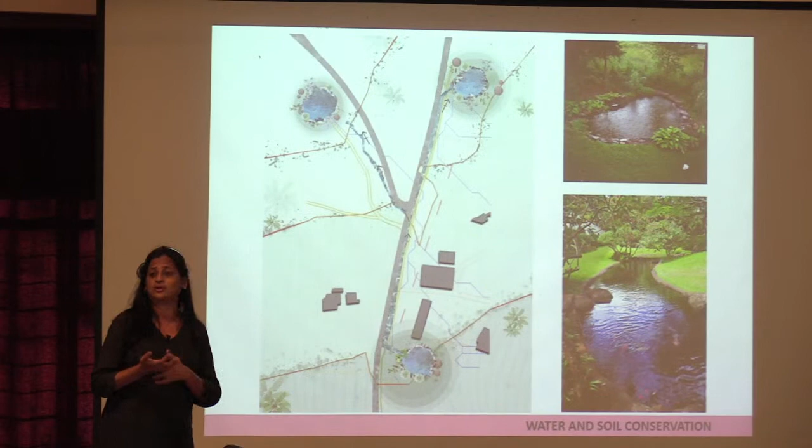And they will be in form of art. We need outdoor spaces for these, it's inside. And they'll be in form of water and soil conservation, because that is also part of our value system. And the different building materials that we have been exploring ever since Roger and Poppo and Piero and Helmut started building.

With that kind of a background, I come back to the proposal that we have further worked on. So these are the existing buildings in the residential zone, from Solar Kitchen up to Sante and a little beyond up to the park. What we have here now is a slightly different version. So what we had tried before was to take the footprint of the Galaxy, and now what we have done is we have interpreted that into different scaled spaces interconnected.

So along with the existing, we have kept the proposed spaces. We have talked of connections on the top and also on the ground, where the street widens and narrows from time to time. It widens to accommodate activities, sitting areas, impromptu chai, dosa stalls, pan galas. So yeah, it widens to accommodate those.

It also widens to accommodate bazaars, farmers market, weavers, name it. And Manu has talked about different possibilities of having bazaars. So we have different bazaars here.

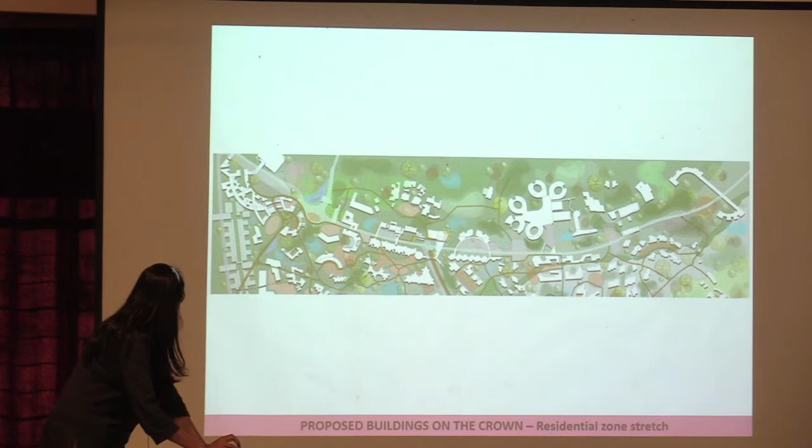So the space around the street is kind of punctuated, making it wider at places, narrower at places by activities which will be used by us. At the same time, as mentioned twice already, if an ambulance indeed has to go by, the other vehicles are able to be on the side, and the ambulance can indeed go by.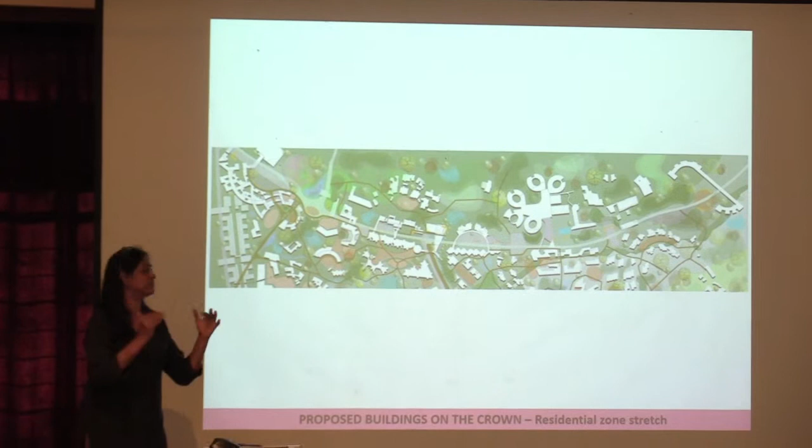And what we have here, we have taken the inputs from the residents last time, and we were told that when we connect built spaces to each other, let us also have a common function. And I was told that why not have a parking for Solar Kitchen, because people come, they park, and it's required, and it's so ugly. So this is of course not a design, but a kind of urban design where we say that we can have connective space.

And I was also told by one of the youth that yes, we want to be there, out there, but not all the time out in the open. So we want some space away too. So then we reworked on the form and the feature of the youth space, where it is partially on the road and partially away, and they have their own inner space. Complementing that is another space, more public in nature, and then the road that takes you to the parking.

And as Mari has previously said, then most of the parking can happen here, along with other activities that can be thought about. I leave that to everybody to dream about. Yeah, in this way we went ahead, and maybe I go to the next slide.

This is more in detail here. And then, because I was talking about connectivity of built forms, of pathways, of people, of the green and of the blue, I said we need to go beyond and see it's not just around the crown that the galaxy will manifest, it will manifest beyond and even on the inner side. So I have gone ahead with really very basic urban design forms.

Which are talking about a face which is more public space where people can move about, and secondary public, semi-public facilities can come over, and pathways that go beyond through those. And they have a face which is more private, and there we talk about water conservation and more private space, that there are the built faces have their own character, one of them that allows the movement of public, the other side or the third side which has expression of silence and privacy, both.

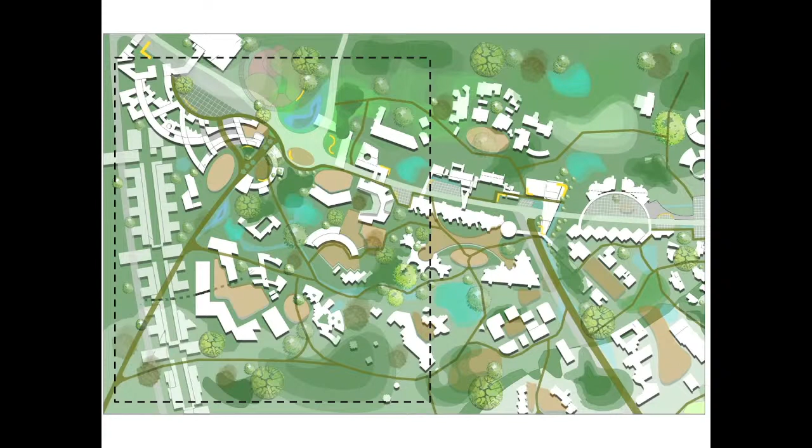So we try to put these together and make a kind of a fabric. And this is a fabric of green, blue, walkways, and what I'm terming as the red, that is a public space, it's just to give it a color which is a fun color. So let's have our plotting beyond these, so that the greens and the blues and the reds are common spaces, including this cafe. So yeah, these are kind of spaces we have thought across the library.

This is the existing library building. This is semi-covered space. On the ground floor, we will have book reading and other related activities, more quiet and silent. There are exhibition spaces here, installations. So these are the spaces to read.

These are art, interactive art, and installations, because here in Auroville, when we talk about values of courage, of transparency, of togetherness, we have issues which are burning and which we care about, and we need to have spaces to put them up, discuss them, and talk around them, because we are here to look at it, be honest about it, humble about it, and find ways to work further on it. And this space is the bazaar that I mentioned, which would be looking different at different times.

And yeah, more of the art spaces, which I've talked about before, ephemeral art. And one more idea that came up for this cafe, if we have a cafe, the street is below, and this is part of the cafe. It's possible, connective spaces can be fun, can be differently thought out.

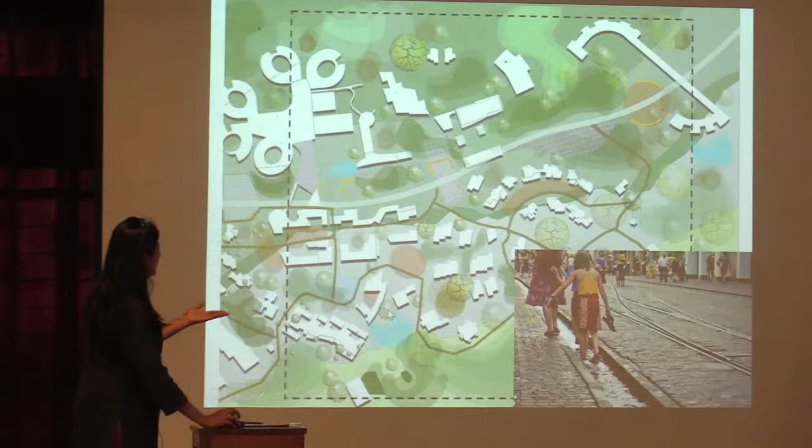And yes, the conservation of water. So we had talked about crown as a bund, meaning we are not just holding water at the crown and flooding it. The water has been conserved, and as per the experts, in different parts, connected through. One of them is crown as a bund, and then beyond the crown as well. At times it is made possible to feel.

And then we were thinking here, and I've changed that, Marie. So I've changed the footprint here to accommodate built spaces which can be more for the green, pro-green, talking about water harvesting and so on, in the cultural zone, in the green, in the park area.

And then we were thinking this is an unpaved space, and we were thinking that we could have a circle of trees and we pass through it. So when we are passing through the park, yes, we have trees around, but there is a part where it's open and the trees are holding us, literally so, and an experience of that.

This is without the built areas, the green, blue, and the red, and the places for impromptu pani puri, dosas, chais, and also the seating. We could not mark it separately, the seating, because I was told it's very important to think of seating from different spaces.

And then I was asked by one of the participants, one of the residents, when we are talking of a street which is not following a perfect shape of a curve or straight line, what is the rationale behind this, logical? So one of the rationale is that movement we are thinking of rather than only mobility.

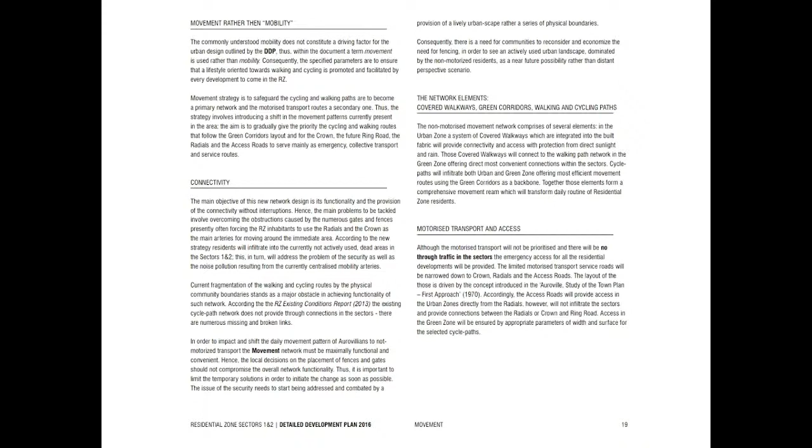This is from DDP Luis Feducci. And it has been proved already that when we have narrower roads, winding roads, automatically the speed is less. In fact, this is a crown in residential zone sector 1 and 2. It's not straight, it is what you see.

And then what we did was, because we were stuck with just one area, we said, now let us really take a fresh sheet of paper and put in our ideas, what we have been trying to say. So we are talking about built spaces which are having mixed land use over here.

There is a possibility of a tram, and yes, the pedestrians, and it's a shared space, but we have other pedestrian spaces also. There are options. It's not like you have to walk in the middle of the road so that the car becomes slow. No, you can walk wherever you want.

And then there are different types of pedestrian spaces at different levels so as to accommodate different activities. Some areas given away only to green and only to blue, which creates different sizes - the minimum size we have taken here is 6 meters, and it increases.

We have also some parking spaces, because if we are talking about cafes, there'll be some parking on the sides. And we are talking here about the relationship of the pathways to the built spaces, the areas considered, the dimensions, and the through connections which are shaded connectivity.

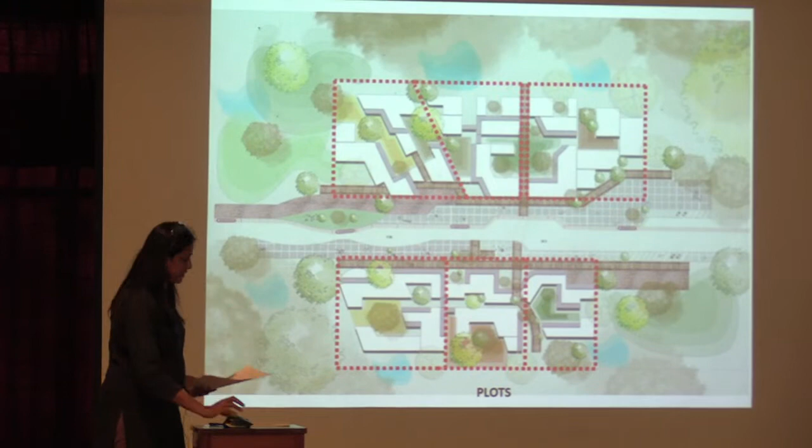And we have worked out the areas here, because I feel finally it is the plotting that is important, and the urban design features, and the water and soil conservation guidelines that have to come with every plot as well, of what kind of water conservation, where, how much, and so on and so forth. And yes, space for impromptu activities to unfold, that should not be plotted.

A close-up of this, I think sufficiently you can see there are different types of mobilities possible, and it's a shared space with ample walking around and through. And these are some areas we have worked out, and the population in this given diagram. Harita, you want to say something about it? Or it's okay, we go on. If anybody's interested, we can explain.

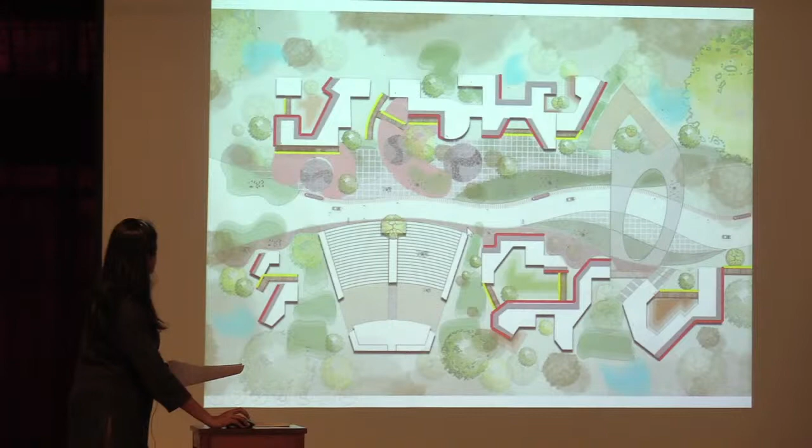And then this is one more option we have done, because not only built spaces need to be connected, there can be different other activities that we envision around, and they also form part of the connected fabric. Here now we have again worked with connecting across, so at parts the crown road or street is wide, at parts it is narrow, both for a reason, both giving different chances and different opportunities and different environments for us to experience different connectivities, connectivity through. And yeah, a close-up of the same.

And why so many urban design guidelines? It is because somewhere in being the modern people that we are, we have forgotten that every line has a meaning, which the architects used to know before. When they drew a line, it had a meaning to it, it had interconnectivity thought of beforehand, it had various layers. Already in one sketch there would be layers of thought put in. And this is what we need to bring back, and therefore the guidelines.

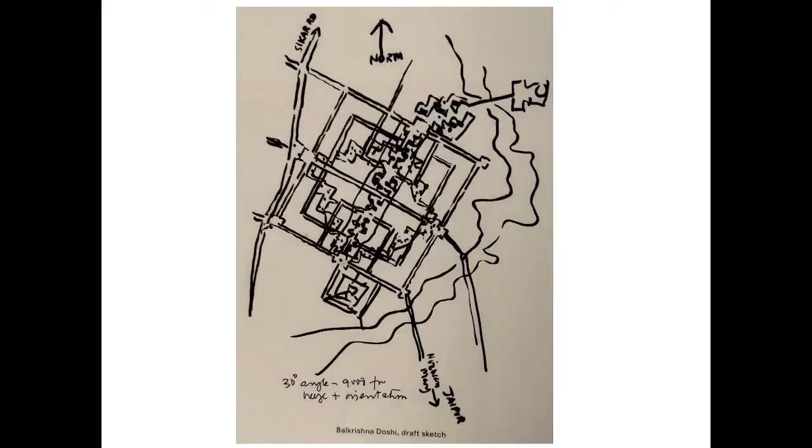And to be really aware that the edges we have hold a meaning in the way they are porous, in the way they are folding into each other or opening out, and the way they fold in give us different opportunities of spaces and usages. And that the hierarchy and scale of the spaces is something we need to remember even if we are working on a small plot, because it is part of a whole, and we need to have that in our consciousness.

And having said that, I come back to the last two to three slides, which I was told I should present again today, of having art as a forerunner in our minds when we are designing. Because if we say we want to make a circle, and even our Vastu Shastra expert has said that whether it's a circle or an organic shape, it has actually the same impact in Vastu Shastra. So what is a circle, and what are the elements that go into making a circle? And can we try out different possibilities and different scales and different lines of the circle so that cohesively it is, or maybe circular in shape if that is what we wish.

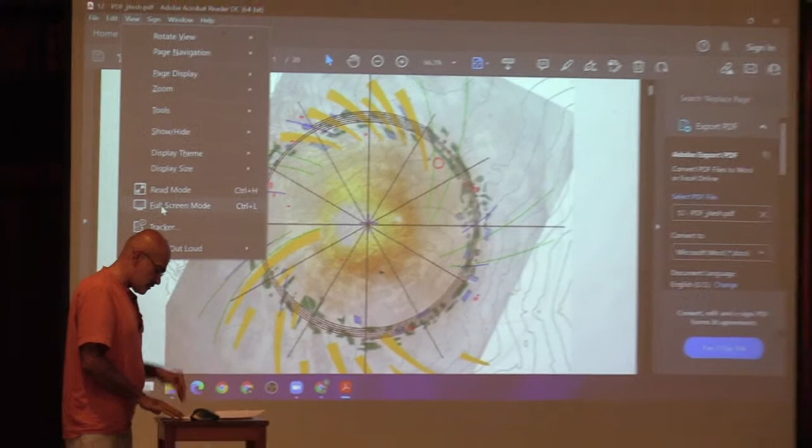So I come from this city called Chandigarh. I'm sure many of you know what it is about. And with that, I would like to introduce this famous adage: map is not the territory. I'm sure you've heard about it. So what is a map and what is a territory? Map is essentially a concept, an idea. It could be a word, it could be a diagram. And what is a territory? Territory is basically the land, the water, the people, the lived reality.

And Chandigarh is, in a way, the map is the territory there, because it's so literal. Corbusier and Nehru, when they were designing it, they were very sure. They were too sure. It's so top down that there's hardly any presence of people, presence of process, presence of change. Of course it happens, it's happened, it's still happening. But is the plan able to, or is the concept able to hold that? That's really a question.

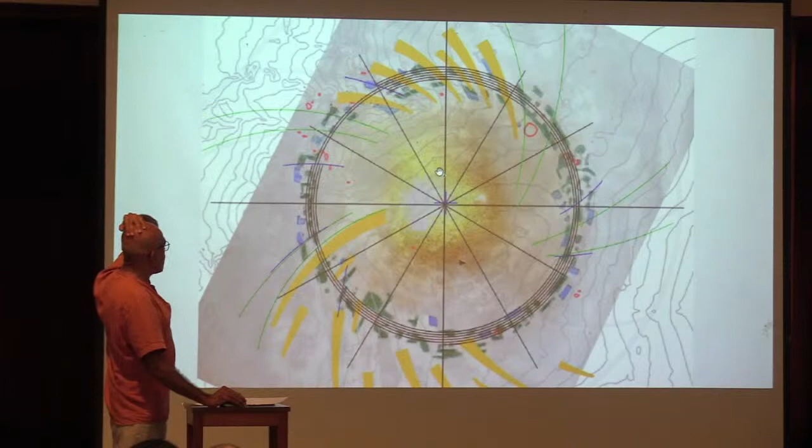So I looked at this, Marie's diagram also was fascinating, where the crown, we all have kind of understood, doesn't need to be the same width, so it can change in different zones. So I looked at the Darkali area and the industrial zone. It's still like a lot of exploratory process.

So there I just have a couple of sketches that I'll share and go back and forth. Zooming in, I was looking at these areas, basically trying to draw what is there in terms of pathways, canyons, the trees, and seeing what are the possibilities of whatever we've been talking about. For example, the line of force is a wonderful idea because it's already sitting in the canyon, and one could have a series of kunds, maybe tree houses or something, fabric that still has some remnants, some resonance with the galaxy, but doesn't have to be literally that.

So this was a challenging thing that we tried to take on, in the sense, how can we build this intersection? It came from this intersection where the crown obviously thins out, and we're looking at it as something that wherever it needs to widen, it widens, but wherever it needs to be thinner, it allows the water or the silt to flow through it. This junction became something I'll talk about a little later.

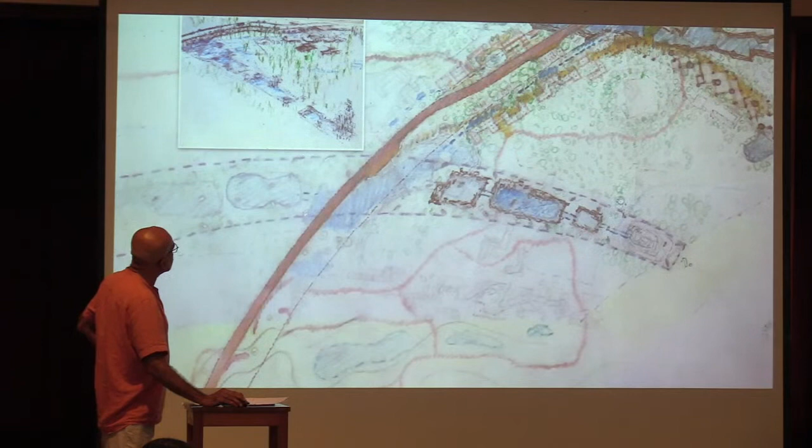Sorry, they're faded out, but this is more like this area, looking at it from here. Some of the cross sections we've been thinking of, what this could be, and it could have a lot of character. This built landscape could have gabions, could have eventually moss growing, or things growing. It really becomes a solid mass, which can allow for this porosity. We could also maybe cantilever a bit of it. So there are different possibilities.

So this cross-section, once again, looking at how we can negotiate that corner or that intersection with the raised crown, and these are different levels that one could enter into from the crown itself. And then through these widened areas, one could enter the line of force and create this very interesting urban form here.

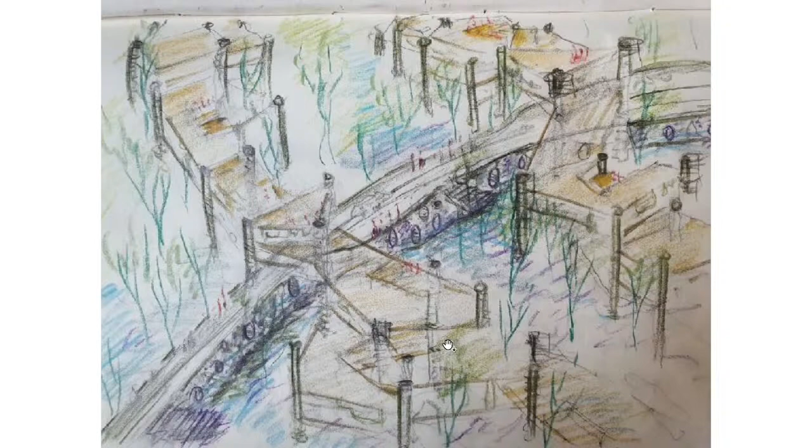So here we are thinking of these as structural — either the structures or the services — all could happen through these cores which are coming down. So it's like stilts, basically everything is on stilts, but allowing for the forest to weave in. So this is like the area in between the two lines of forces.

This could, like what we've been talking about, what Shelja also just presented — this is very doable, I feel, where we have a character which we can, in a way, define, like how much area, in terms of percentages, we allow to be really close to the ground. So we could create sort of these zones almost, and have that character emerge.

This is like some diagrams of how we are looking at the form of the line of force itself. There's an intern who's working on this — he just came up with this, so I thought I'll share. This I've already talked about — some examples of what could happen with these raised edges.